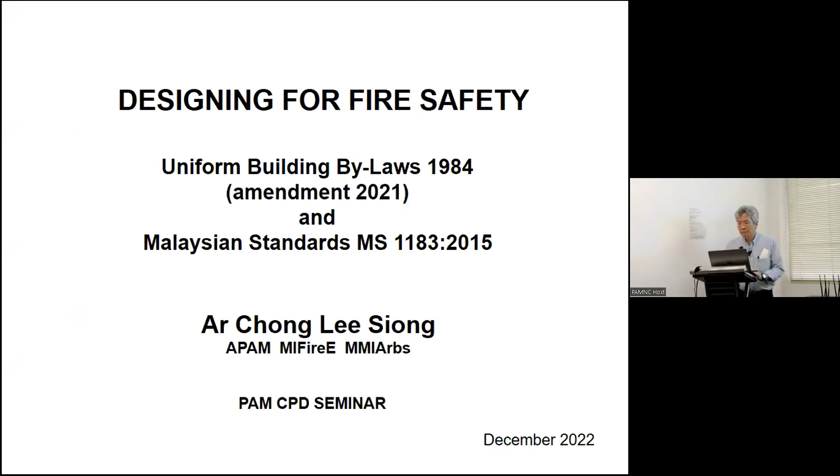So just to recap, the Uniform Building Bylaws are actually a prescriptive building code. It is a law, right? Unlike a lot of other standards we may be familiar with, this document is actually a law, not a standard we use as our guide to designing buildings. It's the same way you don't learn how to drive by studying the traffic laws, you learn how to drive by physically learning how to drive. Then you learn the laws to give you the limitations or prescriptions as to how you should behave on the road. So the law is just that. It is a prescriptive building code. It doesn't tell you how to do things, and it doesn't tell you why you should be doing it. All it says is that you shall do this, you shall not do that. Whatever you design cannot be smaller than this, cannot be bigger than that, cannot be shorter, cannot be longer, etc.

Following on to that, we have the Malaysian standards, of course, and not only 1183 - 1183 is the overall standard, I shall say, that prescribes fire safety. The standard is more descriptive, it provides informative descriptions. It establishes what are common and good practices, and most importantly actually describes the performance criteria expected of a design. For any particular element it will describe to you what is expected, why that particular element should be considered in a particular manner, and what would be the right way to do it. So the UBBL sets the parameters, the law, where you cannot exceed that threshold - if you exceed it, you're breaking the law physically. Whereas the Malaysian standards, by understanding them, you'll find that yeah, now we understand why the laws given have got those limitations.

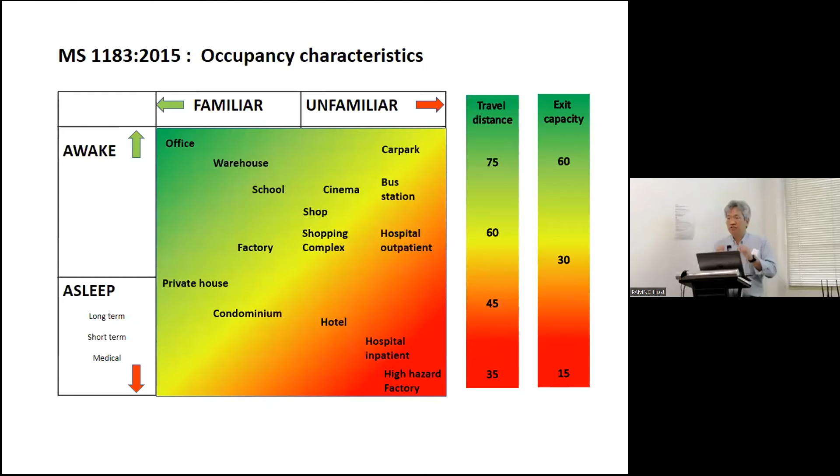The good thing about the bylaws is that you don't have to figure all this out yourself. All you have to do is look at the correct schedule and point to it. That's the good thing about bylaws. While it's not too informative about how we arrive at these figures, it gives you the general guideline. Once you comply with it, you're deemed to comply and your building is deemed to be safe. That's the whole purpose of the bylaw.

Okay, let's go on to evacuation. We're all very familiar with it now. Evacuation involves detections, alarms, exits, travel distances, components, and capacity of exit. These are all the things that are defined and described in the UBBL.

The accepted assumption in designing for safe evacuation, always remember this: the law does not expect you to design for all situations. That would be for us as an architect. When designing a building, it's for us to figure out what is best for the particular purpose of the building we're designing for.

That is our job, our obligation, and our professional responsibility, and hence the liability that comes with it when doing any project. But what the law does is give you a very broad frame, saying if you make this assumption, you would have exercised the minimum degree of professional discretion. That is all it says. So only one fire at one location at one time. That's all the law says is sufficient.

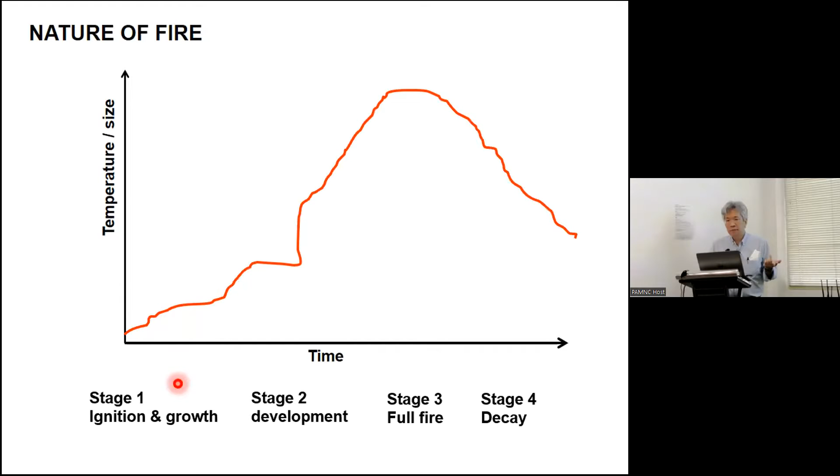So fire temperature, size, and time. Okay, the temperature will start with the first stage, which will always be the ignition. You have oxygen, you have heat, you have the fuel, and then you introduce sufficient heat to the point that the fuel can release its carbon molecules for the oxygen to hang on to - then you have combustion.

That is the first stage. If you have sufficient fuel and sufficient heat for the combustion process to continue, the fire will start to eat its way and grow, becoming hungrier and hungrier exponentially. You'll hit a point in time where the temperature reaches a height where everything else starts to combust - that situation is known as the flashover. The flashover is the point.

It's a bit like your oven. You set your oven - you want to roast a Christmas turkey. What's the temperature to roast a turkey, 200 degrees or 250?

Let's assume the oven is set at 200 degrees. When the oven reaches that temperature, everything inside it—your turkey, tomatoes, carrots, whatever you put in, not lettuce though—will start browning because it's 200 degrees. Set it at 300 degrees and everything turns black. Flashover refers to that condition whereby the temperature reaches a threshold where the contents in the building, or in the oven or room, will start to combust naturally, without any flame being introduced, just because the temperature has reached that point. That threshold is called the flashover.

So designing for evacuation means looking at that very early phase of the fire's development. If I enlarge the graph a bit: you have the ignition, the fire starts to grow, and it reaches the untenable condition—this is not flashover, but untenable condition. So at this point in time, between the ignition of the fire and when the condition reaches untenable, that is called your available safe egress time.

In the apartment fire just now, the available safe egress time was something like less than 10 seconds between the ignition and the explosion. So they had 10 seconds of available safe egress time. The two occupants in that condominium had to get out within that time.

So when we do the design, in terms of available safe egress time and getting people out, you must first be able to detect the fire. Then after detection, you must raise the alarm so you can determine, okay, I can't put out this fire, I have to run out. Then you have to actually start moving, and finally you need time to get to the door and shut it behind you as you leave, shutting the fire in. So that's also evacuation—in any incident, it goes through exactly the same stages: detection, then alarm, then movement, then finally total evacuation.

So the way we design fire safety and come up with the prescriptions is that we want to establish what's called the required safe egress time. We want to design the facility to allow all the occupants to get out of the building within three-quarters of the available safe egress time. That is what we do.

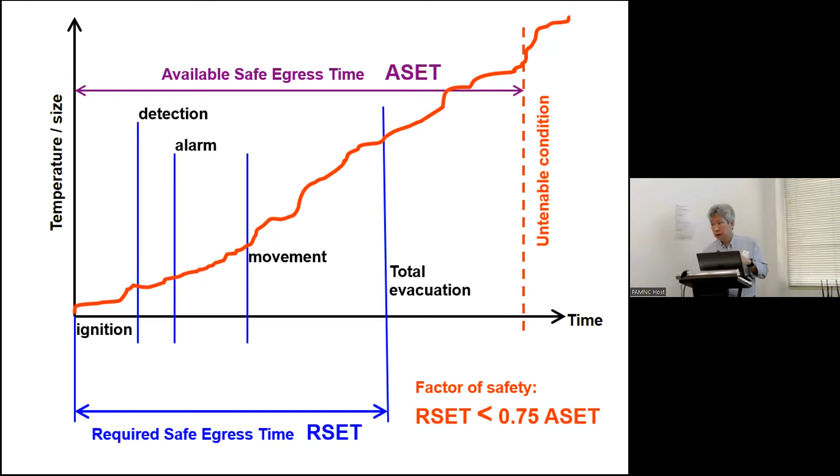Okay, all right, so we come to exit. Now we're speaking about components. We have to recognize these terms. When we're designing for exits, we have to recognize what is known as the final exit, alternative exits, story exit, and horizontal exit.

I've got alternative exits in inverted commas because alternative exit is not actually a described term. You have final exit - final exit is one definition. Story exit is another definition. Horizontal exit is another definition. And any of these - final exit, story exit, or horizontal exits - can make up alternative exits. Alternative exit is a requirement that on every floor, you must have an alternative exit. That means you cannot rely on just one mode of exit in one direction. You must have an alternative exit.

And exits can be, of course, the final exit is the final exit. You're supposed to hit the final exit, right? But before you hit the final exit, you can have story exits and horizontal exits. And any of these will have to be configured for every floor to have alternative exits. And then connecting the final exit with the story exits and the alternate and the horizontal exit will be what is known as the exit route.

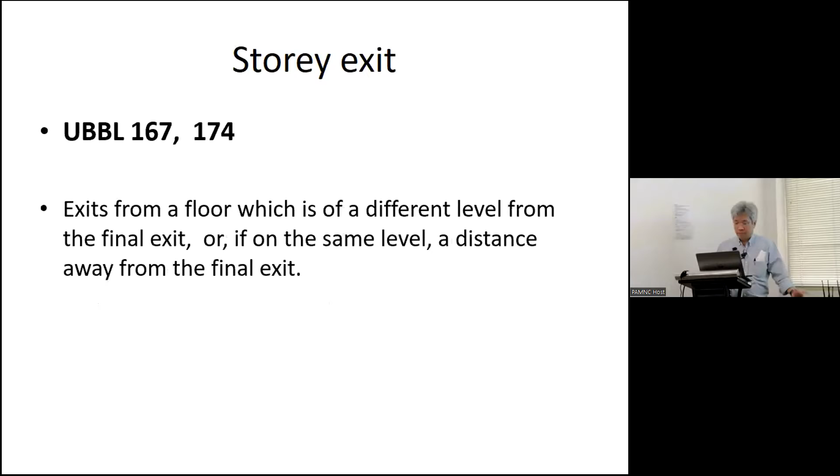Horizontal exit is generally an exit that leads to an adjacent separated compartment within the same floor. The storey exit is the exit from a floor which is of a different level from the final exit. The exit route is generally the protected passage from a story exit that leads to a final exit, and this can include places that are designated areas of refuge, anywhere between the story exit and the final exits.

Now, this is where the travel distance comes in. Travel distance will have the dead end limits, the direct distance, and the open plan distance. We should be quite familiar with it now.

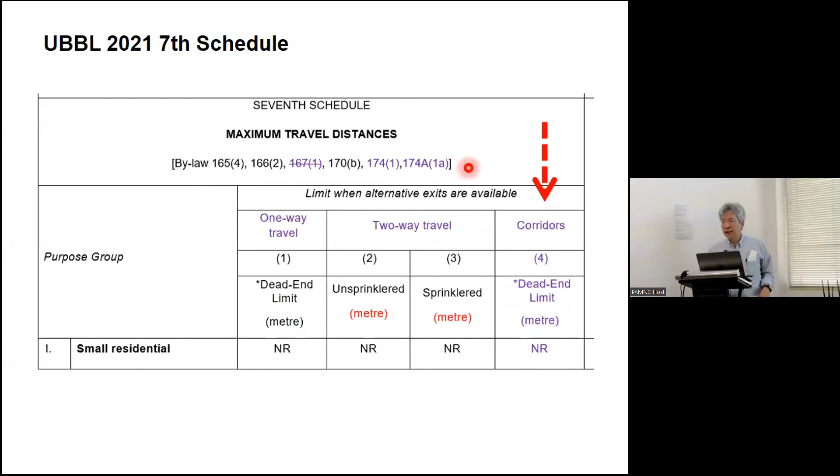The first thing that is now introduced in the UBBL 2021 in the 7th schedule is this additional column. So we are now recognizing that corridors are actually subjected to travel distance limitation. And in this case, it says dead end. Basically, what it means is that corridors, you're applying the same travel distance where there's a two-way travel and where there's a dead end, right? Especially corridors.

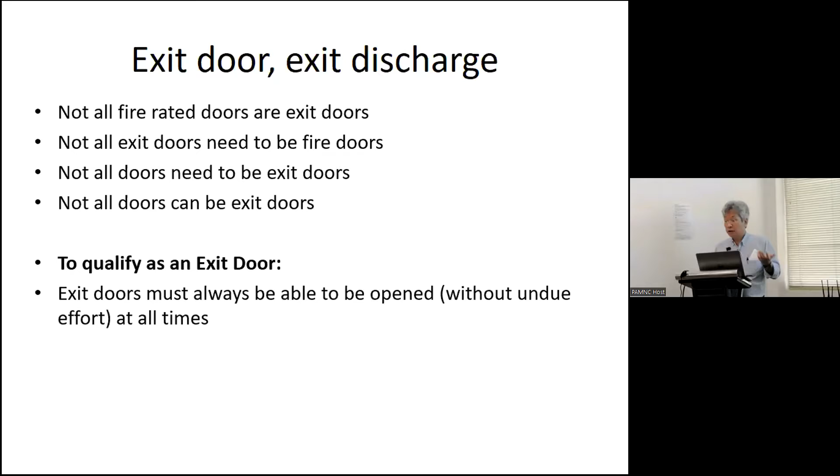Okay, to qualify as an exit door, now I'm referring to the door itself. To qualify, an exit door must always be able to be opened without undue effort at all times. So it's very simple, an exit discharge must always allow the passage of people at all times.

And that is what you designate, right? You can have many, many doors, but they're for accommodation purposes. You need it for security, crowd control, or whatever. But exit doors, you can have all your accommodation doors also function as the exit doors. You just need to configure it in a manner that it can have that dual mode.

Under normal usage, the doors are secured with card access, for example. But if you designate that door to also function as an exit door, in fire alarm mode or in an emergency, there has to be a means to totally disconnect all the access controls, and the door will then function as a push-open exit door. So yeah, just having the understanding would solve a lot of clarification.

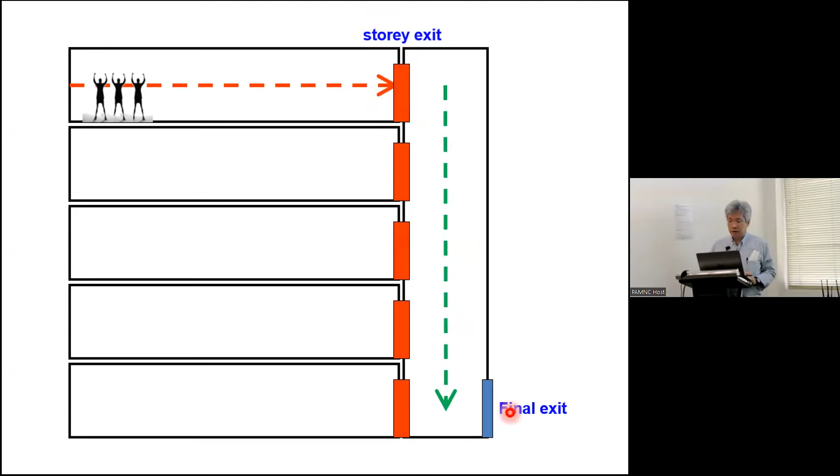So that function is taken by the story exit, right? What would actually have been the final exit is now a story exit because it's now above. And connecting the story exit to the final exit, this will have to be a safe passage, and that will then be known as the exit route.

Right, so it's the same thing. If we have an internal compartment in between, on the same floor, on the same horizontal passage, the person runs from that compartment, crosses that horizontal exit into the second compartment. Now that would then be the horizontal exit, before it reaches the story exit, which then brings them vertically down or up depending on the situation, by the exit route, to the final exit. So the travel distance limitation is within any of this fire compartment, measured from the most extreme end of that compartment to the story exit, horizontal exit, or final exit.

So those will be the limitations of the travel distances.

As to what this horizontal exit actually does, remember we now introduce the recognition of a corridor. So when do you apply the concept of a corridor, or when do you apply the concept of a horizontal exit? Let's go back to some very basic diagrams.

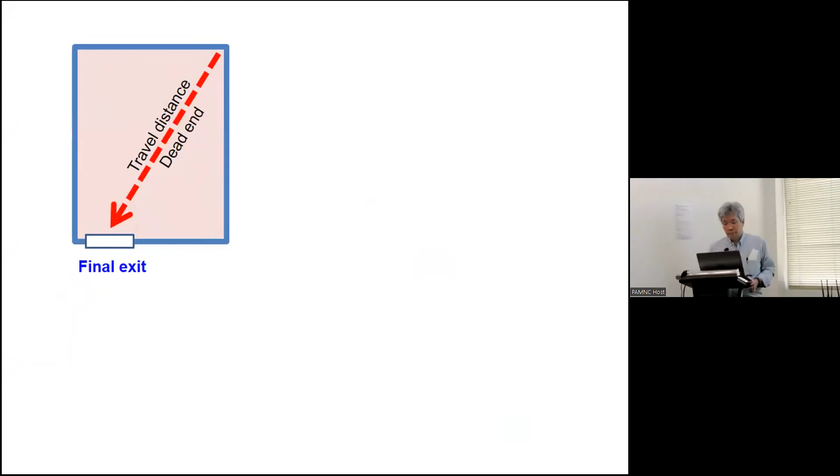Now, if I bring this floor up the stairs, exactly the same situation. Now the final exit is no longer a final exit, it is now a story exit. So that goes into the protected stairs, which is green, for you to be able to reach wherever your final exit is, the level of final exit.

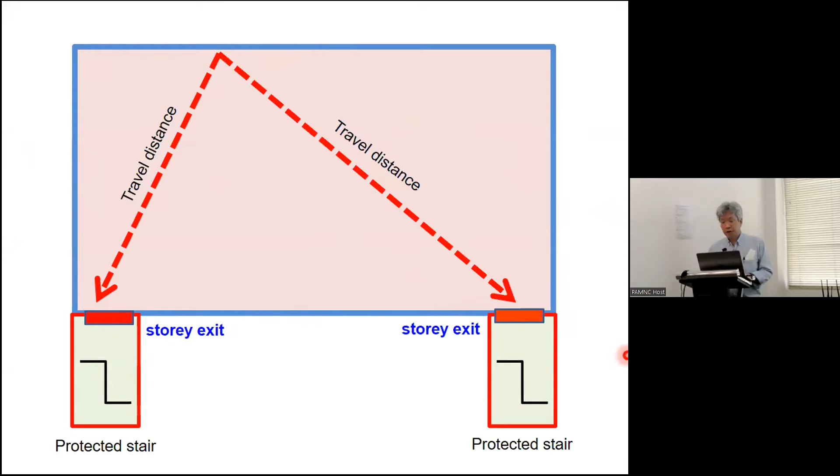If I widen and make the floor space much bigger, the concept remains exactly the same. It is also whatever the travel limitations are within this space for you to reach the story exit that will eventually lead to the final exit.

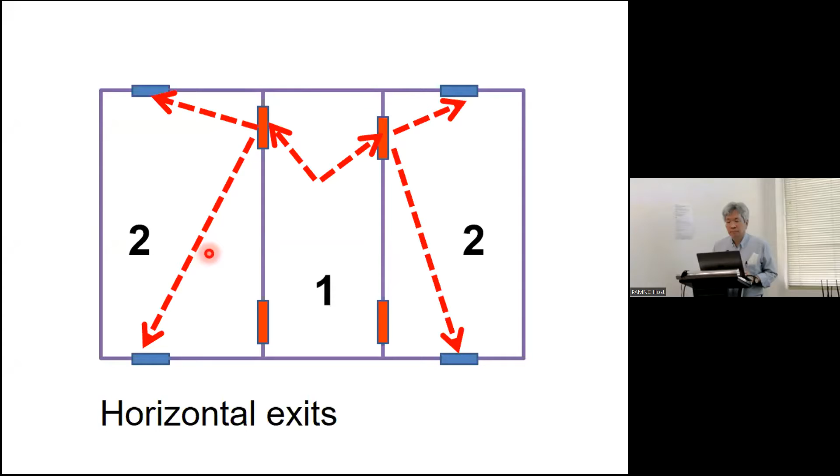Okay, in the situation of that concept, you can, but you will want to define it this manner. If I go back to this, if you have a very, very large condominium here, say over 2 stories and very, very deep plan, there are travel distance limitations within your own compartment. Dead end, in UBBL 2012, the dead end was 20 meters. So now we have reduced it back down to 15 because of this concept here.

So you're allowed to now play a little bit more with the applications of the horizontal exit. Within this one here, you can say go to a horizontal compartment, these 2 ways. But each one of these compartments will still maintain its own travel distances. But each of these compartments will then have to go through one horizontal compartment before it reaches the story exit. So they must have the alternative. It cannot be a situation where this horizontal exit, this protected corridor is over here, and this compartment will have to discharge into that before it goes into that corridor.

The same concept still applies. You can really only get people through one layer of horizontal exits. Same concept will apply. Because the risk is always that if you're the inner compartment, the fire is occurring in the outer compartment, then you have no alternative anymore. And that is always key.

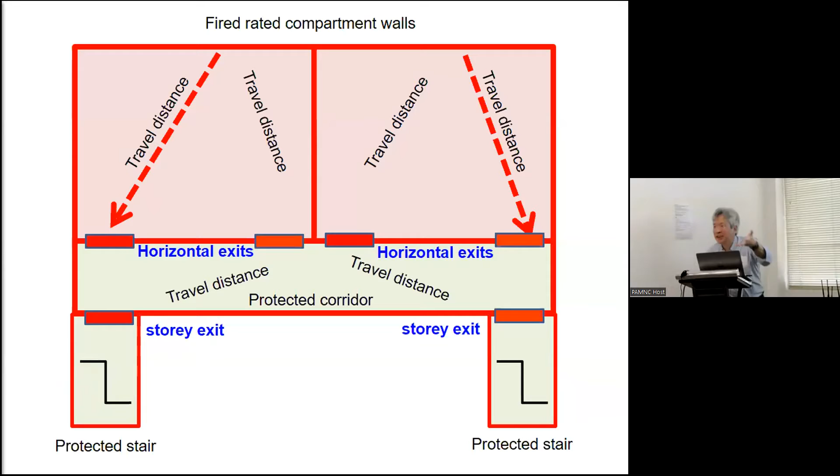Yeah, you don't tell the owner, he wouldn't know. Buy your QS a good lunch so that he wouldn't raise that issue. Yeah, that's right. Well, ultimately, we are the architects - we say so, that's it. No one should challenge it.

All right, so this is the recognition. This practice is not new, this is what it's always been. And by 2021, we just made it clear that this is the way it should be measured. So we hope that from now on, this should solve a lot of the problems.

Another addition to UBBL 2021 is this. Just to recap with this diagram, we've got the travel distance, storey exit, exit route, final exit, horizontal exit. So this area over here where the final exit is - very often, our actual final exit is a distance away from what we think was the original final exit. This is particularly prevalent in, say, a hotel or a commercial high-rise building. The stairs and the lobbies all come down to the lobby, and then you say, so where exactly is the final exit? Your stairs open up, I'm in the lobby, and the lobby's got Christmas decorations, etc.

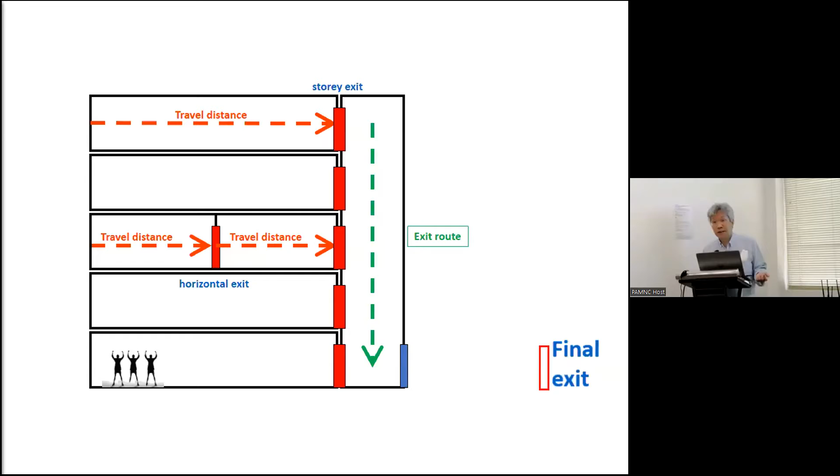So UBBL 2021 addresses this space over here, from your discharge, from the stairs especially, down to the fire appliance access level. And if your final exit is actually a distance away from the exit of that protected shaft, now we call that the path from storey exit discharge to the final exit. This is where UBBL 2021 has come up with new prescriptions - it's in clause 174A under final exit, immediately after 174. They just slotted this additional thing.

To cut a long story short, it's like this: if you have a simple arrangement, you have the protected stairs coming down - this is the ground floor or the lobby area. You have the ground floor where the final exit, the stairs come up, go straight out to the street - don't get knocked down by a car, but go straight out to the street - and those are the final exits. So the final exits are, that's it - once you cross this threshold, you're in the final exit. Now, what this new clause does is, it sorts out this area over here, if you're discharging into, say, a courtyard, you're still within the building compound.

You still got fences, you still got the main gate somewhere, or you're discharging into a Medan Selera, or into the lobby podium, where you'll see that the owner has rented out all the space for hawkers and kiosks, or there's a giant styrofoam Santa Claus decoration, things like that. Okay, now this is where 174A comes in.

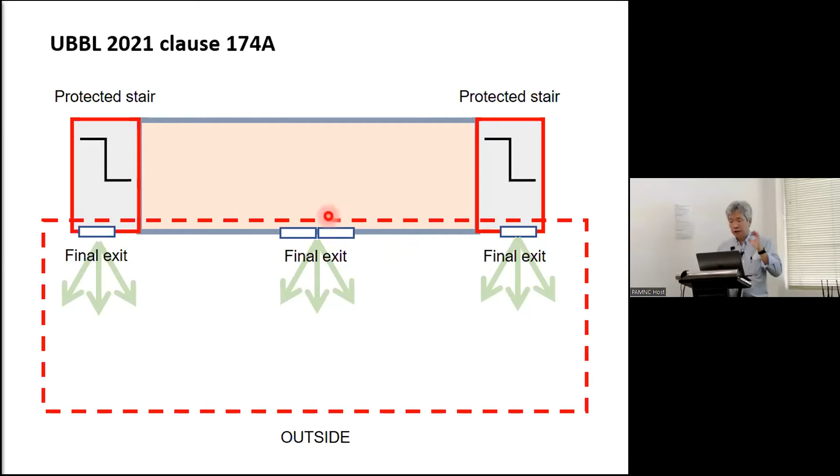It gives you additional prescriptions and what you can do within this space. Once you discharge into this space, from this final exit you have to go either into a protected and enclosed corridor with the distance and dead end limitations as per the 7th schedule, or you can go through a sheltered, open-sided corridor, not more than 5 meters within the building.

Okay, I know you'll be wondering what in the world am I talking about here. I also didn't have a clue what it was, so I had to do a bit more investigation. I will describe it to you later.

Or open to the sky and an unenclosed corridor with two-way travel. Essentially, the last one just means if you go to an open courtyard, as long as there's nothing above you and you got two-way travel to an exit, to a final exit, that one is very simple. The first one is also very simple, a protected exit corridor.

So you come out over here, okay, and you're having a lot of commercial activities over here. So what do you do? You create a protected corridor. Come out, enter a protected corridor with the travel distance limitations, and go straight up to the exit.

Very simple. The last one is, okay, go into an open courtyard area, totally unenclosed, and you can travel in 2 directions to the exit without travel distance limitation.

Okay, number 2 is the one that's a little bit funny. Actually, we plucked this straight off from the Singapore Civil Defense Force prescriptions. We really thank the Singaporeans, they're actually very good in terms of their legal logic, in terms of how they write things. So the next slide I'm going to share with you is plucked straight off from the SCDF Code of Practice for Fire Precautions in Buildings.

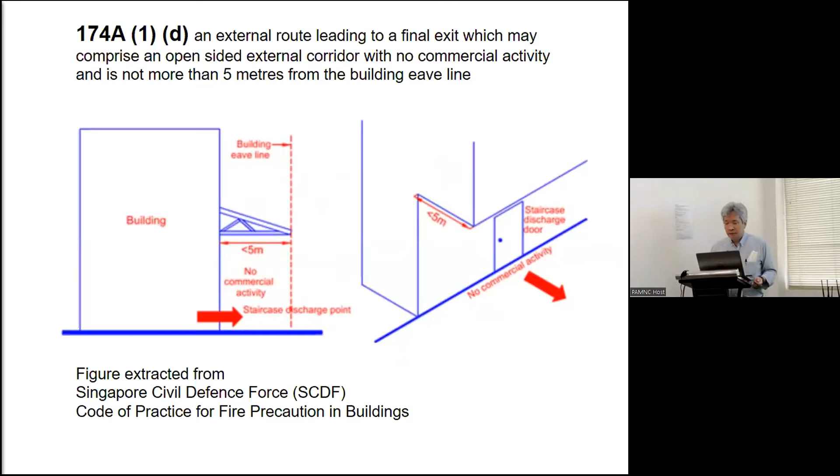We are the architects, so the whole purpose of this is that we are designing such that when a person comes out of this, he's not under a risk for more than 5 meters in this situation. Right, so if the building above over here contains aluminum cladding — later on I'll be talking about BS 8414 — if that's kind of a risk, no way, you have to get the people out in another manner. Okay, all right, so further on to 174A would be on the enclosed areas that you're exiting from.

Just now was on the stairs going into an open area and the limitations of what you have to do. Now is on the stair discharging into an enclosed lobby. The same concept applies. This should have been the final exit, but however, if the building is designed in this manner, then you'll have the stairs discharging into what is otherwise really an internal space.

The first limitation is that you cannot have more than 50% of the stairs discharging into an internal space. So if you only have 2 stairs, both stairs and capacity, you have to balance it off. Physical number no more than 50% and capacity also no more than 50%. So if these two stairs share the same capacity from the floors above, only one of them is allowed to discharge into this space. The other one must be outside.

So if you have 3 stairs, how do you divide it into 1.5 stairs? No, if you have 3 stairs, then only one is allowed to discharge in, and the other 2 must be discharged outside. So it's up to 50%, no more than 50%. Then from here, you have to designate a travel path from the discharge to a final exit, and this one is limited to 10 meters.

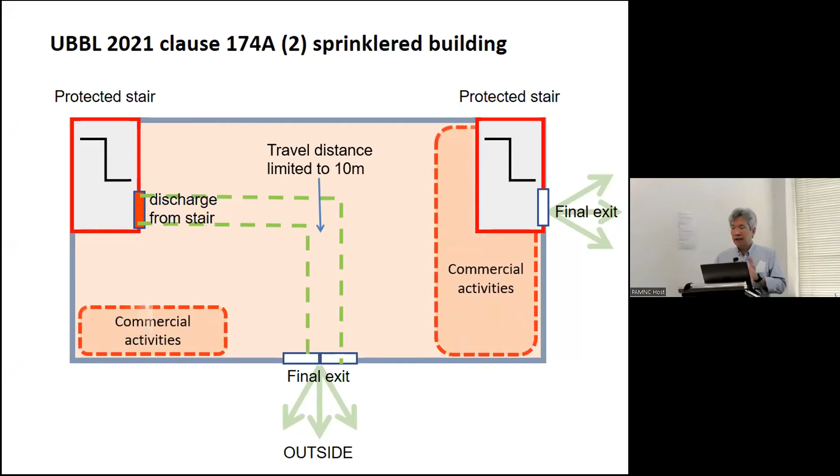Then, as to what else you can do around it: if you're not having any firewalls or compartment walls, and you're having any other commercial activities like kiosks, Christmas decorations, anything that may be combustible, you'll have to keep it a minimum of 10 meters away from this designated path of travel.

I know this diagram is not to scale. There's a 10 meter travel distance limit here, and yet I've got a 10 meter buffer here which appears to be a lot shorter than that. Okay, my apologies. When I was drawing this, only then did I realize I can't exactly get the right scale in place. So the written dimensions are the more critical ones.

Any commercial activities which are not fire isolated, meaning not behind a firewall or not in any compartment, will have to have a minimum 10 meter buffer. And this 10 meter buffer is also very generous. Generally nobody is going to measure it specifically - where do you measure it to? Is a person standing there considered a commercial activity, or is it actually the display of the goods? So that is very vague, right?

But the intention is quite clear that if you have a situation where you're discharging into a common lobby, you must allocate a very clear line of discharge route to the final exit, within 10 meters of travel, within line of sight. That means with great clarity, visual clarity as to where the exit is, and keep your commercial activities 10 meters away. So should there be a fire, you will not have undue impact to the people who are exiting from this building.

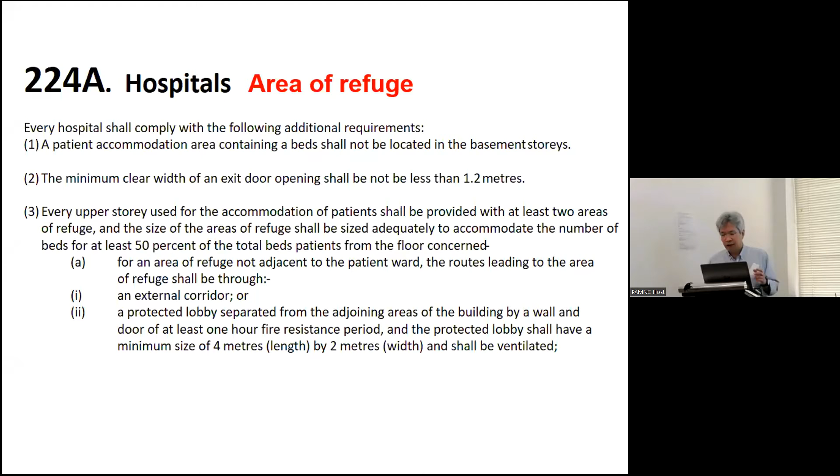I'll go straight into describing what it is. It is all about evacuation or the safety of occupants. This doesn't apply to the whole hospital, only to the patient accommodation. If you're doing an outpatient clinic, or even a daycare or day surgery clinic, this condition does not apply. It only applies to hospitals or facilities where you have overnight stay or long-term stay accommodation after surgery, or any of that. So we're referring to wards. It only applies to wards.

Whenever you have a ward, this applies. So the basic concept is this: every ward must be serviced by, or must have access to, 2 independent areas of refuge. This brings in the alternative exit again. So every single ward must have 2 areas of refuge, and these 2 areas of refuge must be realistic or genuine alternatives, preferably in the opposite path of travel, or at least in a path of travel that is genuinely an alternative, right? Should one be incapacitated, the other one is available.

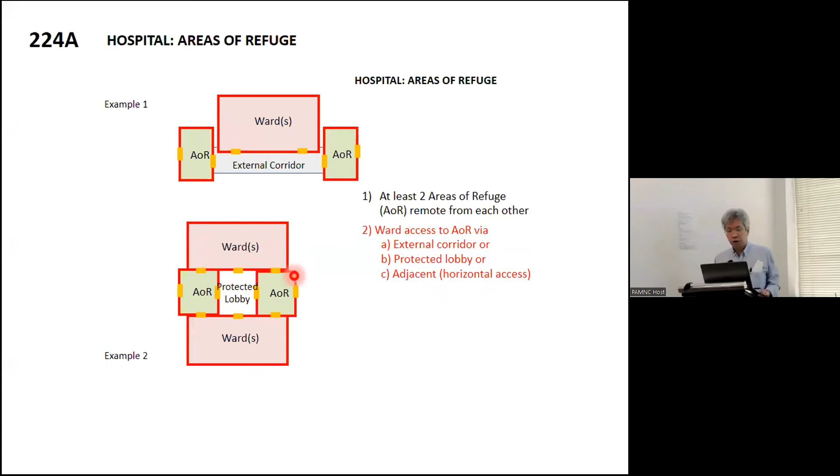The second requirement is that ward access to the AOR shall be either via an external corridor, which in this case I've indicated here, from the ward you go to an external corridor. Just now we were mentioning the corridor, and there were some discussions offline about apartments, front door to protected corridor or to an open corridor concept. The same concept applies here. The ward gets access to the area of refuge either via an external corridor. If the area of refuge is a distance away from the ward, it doesn't have to be adjacent, but you have to go through a safe corridor. Or if the wards are adjacent to the area of refuge, you will have to go via either a protected lobby or immediate adjacent horizontal access. So either you go through a protected lobby, or if it's immediately beside it, then you go through a horizontal access.

And each area of refuge is to be served by at least one fire escape bed lift.

That is the whole purpose of the area of refuge. The clause itself also specifies the minimum accommodation size of the area of refuge. It doesn't give you a specific description on the actual size, but it says each area of refuge must accommodate 50% of your intended bed capacity. So if the ward carries 50 beds, each area of refuge must be able to accommodate at least 25 beds. And it doesn't even prescribe the size of the bed or how you're supposed to arrange the bed. You are the architect. The UBBL allows you as the architect to decide how to maneuver the bed into position.

What about additional spaces for the attendants, the nurses, and circulation or things like that? That one, they leave it to us as the architect to decide and design. The thing is that the area of refuge is supposed to be a holding area for all the stretchers and the beds.

If each area must be at least 50%, it just refers to that you go to one area of refuge and can at least accommodate 50%. So it's like, let's say two wards discharge into two separate AORs, the bottom example. That means we look at the total beds for the two wards, and the AOR must be 50% of that. Can one be bigger, one smaller? It can be, but the smaller one must be at least 50%.

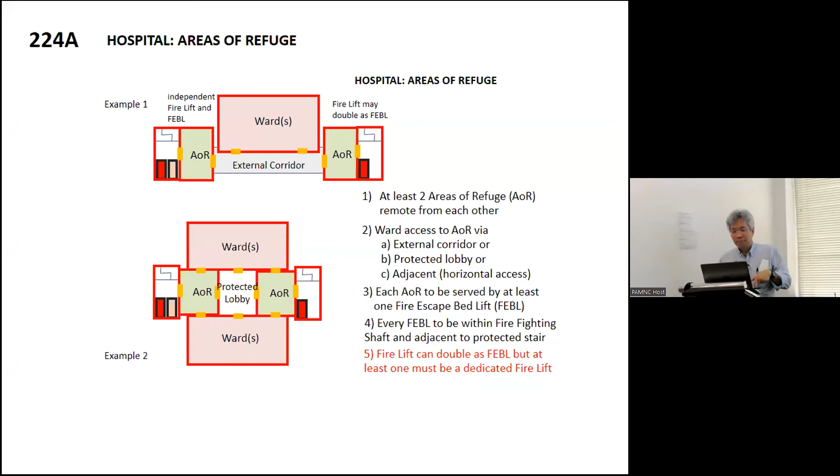So just now I mentioned that to get to the AOR, either through the external corridor, internally through a protected lobby, or a direct adjacent access. For the direct adjacent access, it will be a fire separation minimum of 1 hour FRP. You mentioned that - minimum fire, 1 hour FRP. You must have a minimum engineered smoke control, 2.5 meter smoke layer, and a minimum of 2 exit accesses located as far apart as practical. So if this is the AOR adjacent to this particular ward, you can literally just go next door - these are like a horizontal exit.

Just have the doors - for one AOR, you must have 2 separate entrances as far apart as possible. This is actually to facilitate more movement, so that you don't queue up in one spot - you're trying to move on both sides. Fire rated, 1 hour fire rated, and essentially just an adjacent horizontal access. And this AOR in turn will be connected to the firefighting access lobby.

In slightly more complex situations where wards open up into nurse stations or other adjacent areas, the concept is actually much the same. You'll be entering through either an external corridor or an internal corridor, which is protected or ventilated, going into a protected lobby. Like the other case, if you're not going from the ward immediately adjacent into the AOR, you go through a protected lobby, then into the AOR. If this corridor is going through a high-risk, non-ward area, you'll have to carry the same degree of fire separation. The idea is that this internal corridor acts as the safe corridor to access into a lobby, in turn accessing into the AOR.

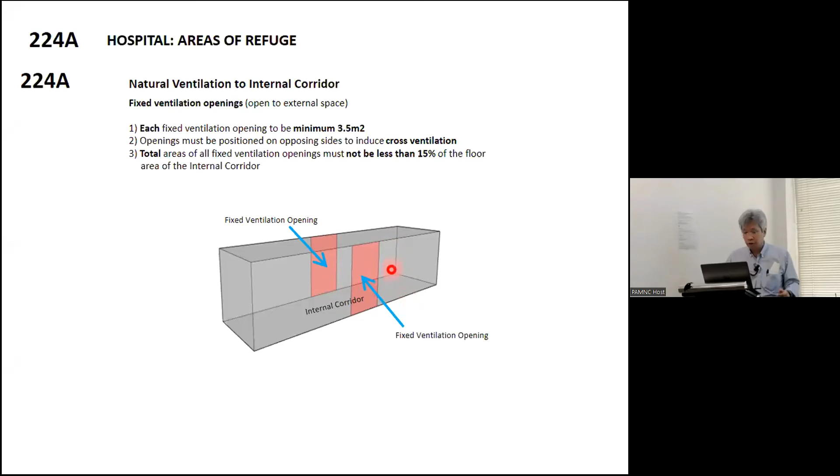When you have an internal corridor, if you're not pressurizing it and instead allowing for natural ventilation, then minimum compliances for natural ventilation come in. You need minimum openings far bigger than the ventilation required for staircases and corridors. The whole idea is to get cross ventilation, which is good practice — really, we should be applying this for all corridors we design anyway.

Specifically for hospitals, they want this defined clearly. The idea is that every single natural opening for ventilation must be within 12 meters of any part of the internal corridor, and ideally placed to induce cross ventilation. So if you have a far longer corridor, the most ideal location would be two openings at the extreme ends, and another one in the middle to comply with the 12-meter radial coverage. That means every part of the corridor cannot be more than 12 meters away from a natural opening.

If you're going for natural ventilation versus mechanical — if going mechanical, then mechanical ventilation, pressurization and smoke control all come in together.

Particularly for hospitals, for areas of refuge, we've now introduced an 11th schedule to the UBBL — we had up to 10, so now it's the 11th schedule. Its sole purpose is for dimensioning stair landings for the maneuvering of stretchers or beds on stretchers. The concept is actually very simple: generally, it controls the depth of the landing.

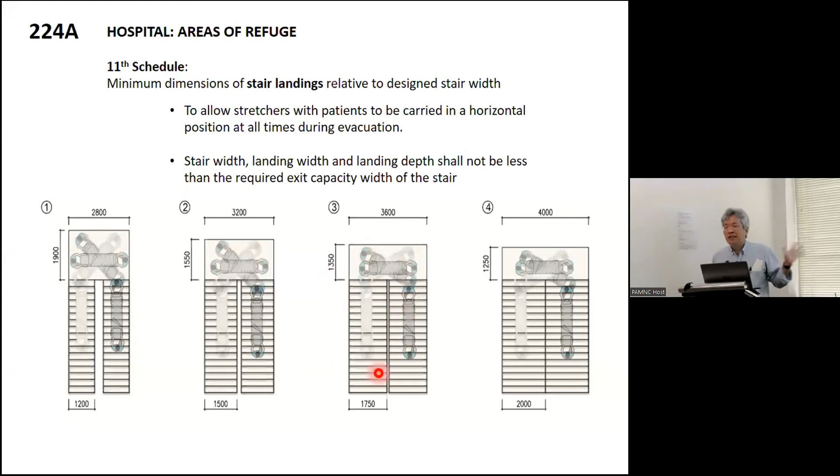There were never any limits to the height of hospitals. It is always limited only by the functional practicality of designing a hospital. There was never any bylaw limit to the height of hospitals. That's a separate thing - Ministry of Health will have their own control. But as far as bylaw is concerned, we leave it entirely to your technical expertise.

Okay, I will skip evacuation strategies because there's no change on this. I'll just skip all of this.

All right, the single stair. Coming back to the single stair. UBBL 2012, we introduced the single stair. That one caused a lot of hoo-ha. And I think now most of us have accepted it.

The limitation was that we limited it to 2 stories. We limited it to 2 stories and made a condition that the upper floors can only be used for residential. Ground floor must be shop, but upper floor - no office, nothing else, just residential. That was the limitation that killed all our developers.

Now in 2021, we just made a clarification - very simple one. Instead of defining shophouses or dwellings, we are now calling them buildings. So yay, it's open up again.

So you can do your karaoke lounge up there now, right? But then you said, how come? How come you had such a big change of heart? How do we do that? No, it's not so easy.

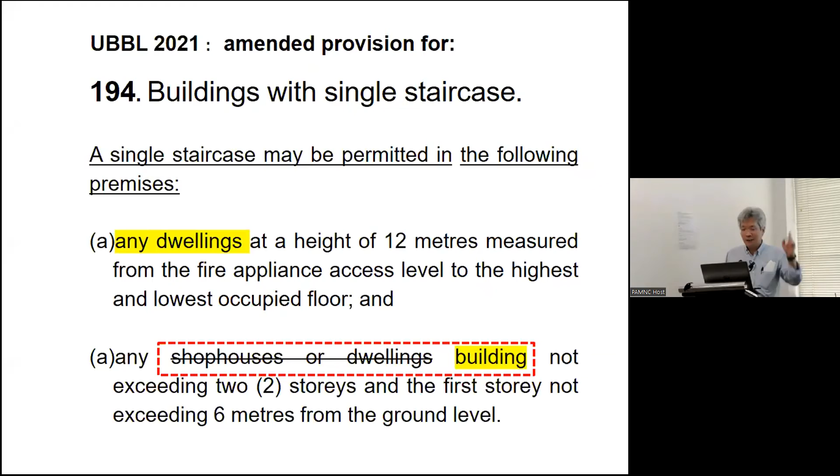The old 1984 definition was like this: up to 4 stories, 12-meter height and all that. So now we're still limiting it to 2 stories, and the uppermost floor only two stories, not 3, not 4 - only 2 stories, and the upper story not more than 6 meters from the fire appliance access level, ground level, which is still the same.

Only difference is that we're no longer limiting the bottom to shop, limiting upstairs to residential. Now it's do as you like, right? But the condition is this: travel distance, dead end limit, exit capacity, story exit and final exit, and compartments all apply. So if you decide to do a karaoke room up there...

Okay, we let you have one staircase, but you're limited to the exit capacity and limited to the travel distance. So if karaoke room is under place of assembly, is it? Okay, there's no dead end limit. So you can't have a single stair if there's no dead end limit. So that's the way they control you.

All right, so do as you like. You allow a single stair, but the floor accommodation must be able to be served by a single stair - travel distance, dead end limit, exit capacity, story exit, and final exit. If you can find a way to make that work with a single stair, you can have that occupancy. I think it's very fair.

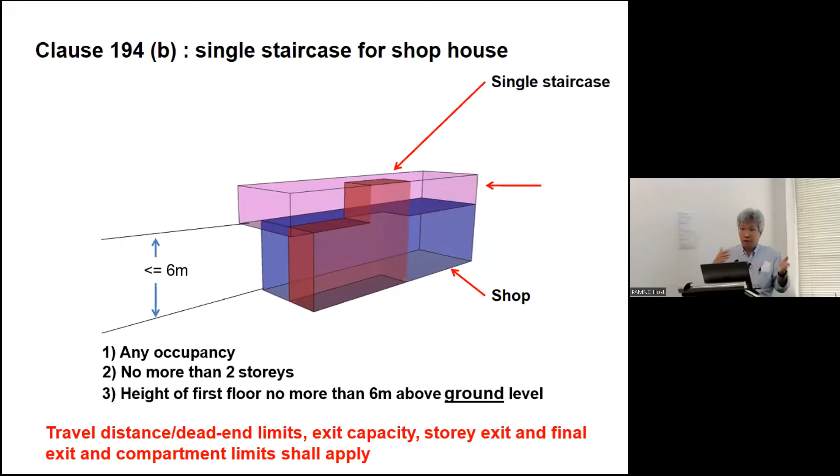It's only 2 stories, you're limited to 2 stories. Silent - so don't get caught. Actually, technically you can, because the mezzanine is half the floor, right? As long as you don't do more than half the floor, then it's okay, right? Okay, so this is it. Don't take too much into it.

It's really a post-occupancy control. When you design it, just design it within the travel distance, within the dead end limit that fits already, you hand over to the developer. Then it becomes a post-occupancy licensing issue.

Okay, capacity of exit - this is where there are some changes to the 7th schedule. We've added in now the controls of capacity exit for storage in general. Before, we never had this. Especially for car parks, we are always asking, how do we calculate exit capacities for car parking? We've always used, as a general rule of thumb, 2 persons per car. And then we find out that, yeah, mana boleh, that doesn't work for such things.

So now we've come up with the prescriptions. Generally, 20 gross is double of that of office accommodation. Office is 10 gross, so for car park we use 20 gross.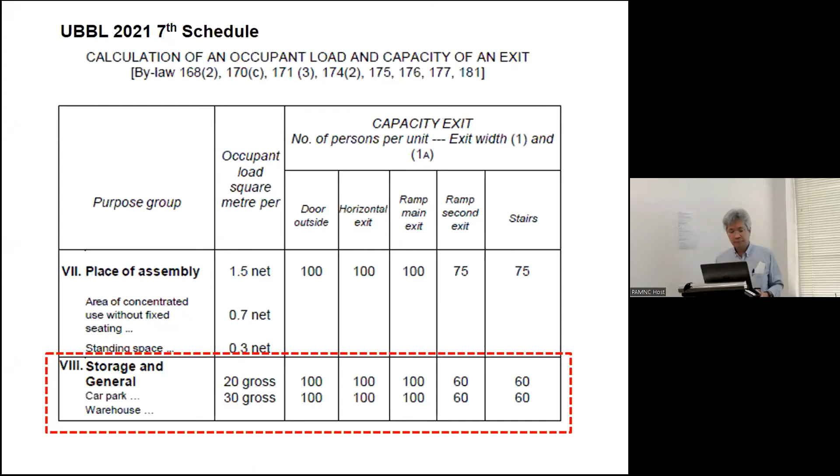Okay, I will skip through all this, there's no change in this concept. I'll skip through all of this too - no change to this compartmentation, size, and fire load, all this has no change. So no change to any of this.

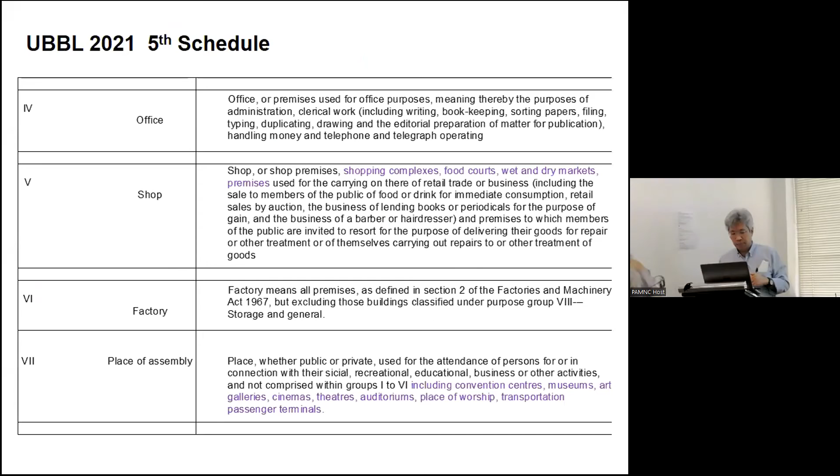All right, the 5th schedule now. The 5th schedule is where we have the purpose groups. Earlier on, I already mentioned that there are just some refinements to the categories of buildings to be placed under the purpose groups. Now, when it comes to the prescriptions, purpose schedule 5 limits the fire compartments of the building.

So alongside clause 224A, where we talked about the wards, particularly hospital patient accommodation wards, now has got floor area limitation. Every ward cannot be bigger than 750 square meters in floor area, and this one is not applicable for the doubling of limits if your building is sprinklered. So this 750 meters is absolute - you sprinkler the building, you're not going to get 1,500.

Just particularly for this, not even hospital as a purpose group, specifically patient accommodation ward only, is limited to 750 square meters. So this one, in a way, also limits the number of beds. They never say how many beds directly, they don't limit that, but within 750 square meters for us to design - it's just to limit that.

Yeah, this is a further one, from the same schedule. 750. Okay, all these remain exactly the same, schedules, all the 9, in terms of how we are supposed to compartment the building. All these remain exactly the same. The 6th schedule, I don't think I want to go into it, this one will be another full day worth of things. Okay, I won't go into all of that.

So now we're coming to the protection of the building from fire from floor to floor. This one is just a recap of what we currently already have: protection of the external spread of fire from floor to floor.

We have our prescription under UBBL 149 for the external fire barrier, the vertical barriers, and the horizontal barrier. Of course we all know the purpose is that it helps to deflect the flames. The horizontal barriers will deflect the flames, 750 millimeters minimum, and the vertical barriers, minimum 900 millimeters, will help to act as a flame barrier. The horizontal ones will be a flame deflector, the vertical ones will be the flame barrier.

Now, we have a situation of external cladding, right? We're all fully aware of that already. I don't think I need to show the Grenfell over here. Okay, why not, you just have a look at it again.

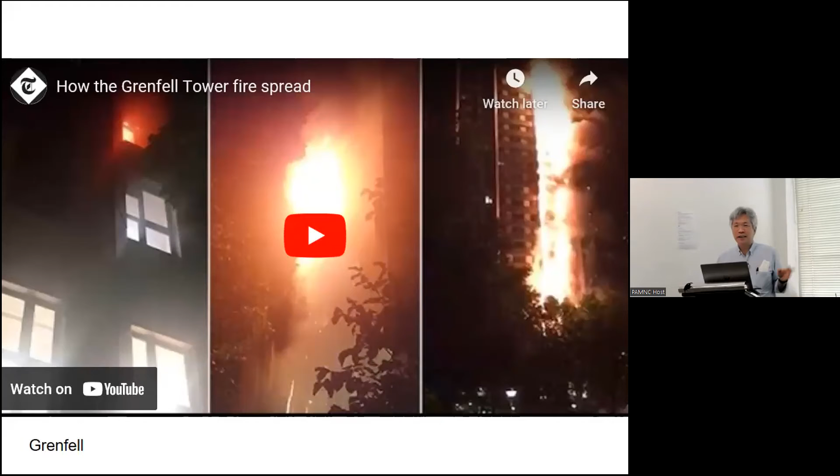Okay, sorry, I can't get the video working, but never mind. We are all very familiar with the Grenfell. Go on to YouTube, there are about 5 million different videos for Grenfell Tower. Suffice to say that it's a very, very disastrous event, very tragic, and it did fast forward our understanding and now the implementation of new laws and regulations regarding how we do external cladding.

This started off with Bomba issuing in August 2021 a permanent directive on the use of external cladding. Can be summarized in 2 elements: for all buildings above 18 meters in height, your external claddings must be subjected to the full-scale BS 8414 test, and it must pass. Then all external cladding for buildings above 18 meters in height must comply with the descriptions of the BS 8414 testing criteria.

Anything below 18 meters in height, sorry, it's not anything below 18 meters. If any building below 18 meters in height, then you are allowed to use Class O cladding. Any buildings above 18 meters in height, for the entire height of the building, it has to comply with BS 8414. Now this is different from our previous description. Our previous description is that anything above 18 meters, Class O; anything below 18 meters, you can clad it with timber, almost anything, and we limit the flame spread to Class 2 or 3 in some instances. So now it's no more.

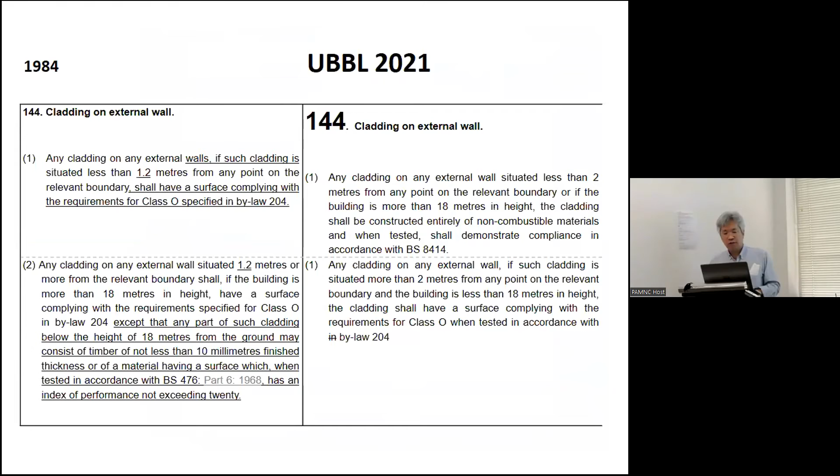So that leads us to UBBL 2021. After the directive, now clause 144 is on that. Again, to cut a long story short, very simple: it just means that if your building is less than 2 meters from the boundary, or your building is more than 18 meters in height, whichever comes first, the cladding system must comply with BS 8414.

If you're just 2 meters away from your neighbor, I don't know how you can build 2 meters away from your neighbor nowadays, but never mind. If you are 2 meters away from neighbor, don't have anything flammable that will face the neighbor. Or your building is more than 18 meters. So either you're closer, or you're more than 18 meters. However, if your building is more than 2 meters from the boundary and it is not more than 18 meters in height, then you may just comply with Class O. So a short building far away from your neighbor, you can comply with Class O. Anything other than that, you have to go for BS 8414.

And BS 8414 is really a series of tests.

It's a particular testing criteria. It involves the creation of a very big size mock-up which reflects every single component that you specify into the system. Most manufacturers, a lot of suppliers, especially the ACP world people, have taken their own initiative to erect their own detailing specifically to pass this test, because this test has got very precise criteria.

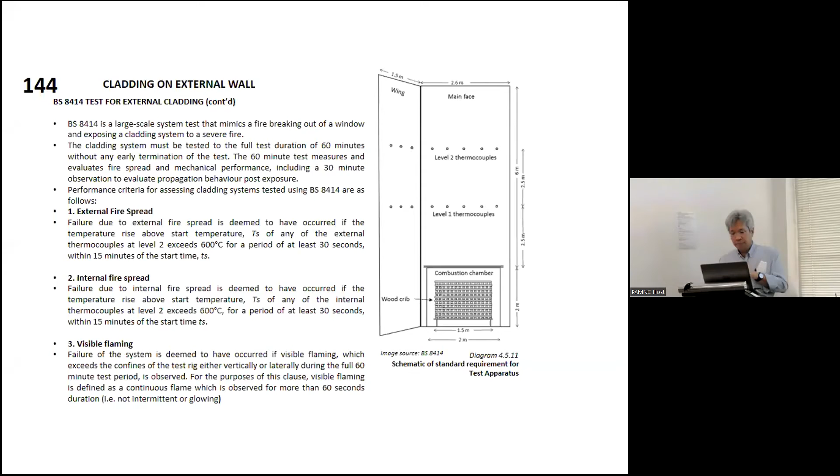Okay, this is a series. This one I must show you the video. I hope it plays.

Oh dear. Unshare. Unshare. Okay, we'll just try and stop sharing. Oh, the link is not clear. Was this one actually linked? Okay, never mind, my apologies. It may not be linked because it wasn't from my laptop, so the link may not be here. The link is missing. Am I sharing the screen again? Am I sharing the screen? No, I'm not. Oh, I'm sharing the wrong screen now. Okay. Okay, my apologies, I can't run the video because I just realized I transferred it from my laptop onto this laptop, and the link did not get transferred.

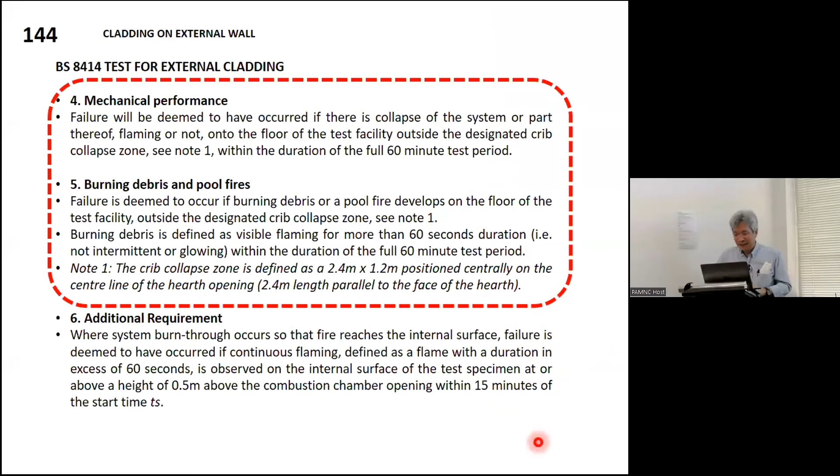Okay, then we go on to the atrium. I'll skip all of this now because this one is exactly the same as 2012.

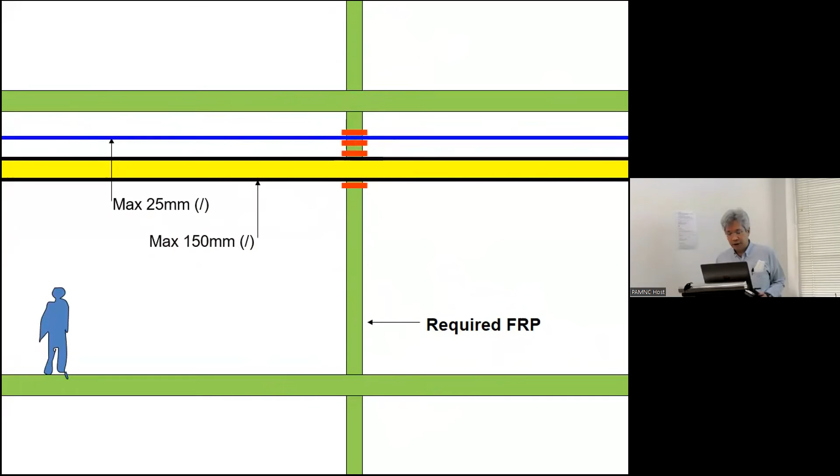All right, protected shafts. There was a question earlier about the full fire rating for doors and the half-hour fire rating. So just to quickly recap, this is a cross-sectional area of maybe a compartment, then a party wall and the slab. All these lines in green are the required FRP. Let's just say it's 1 - if the required FRP is 1, all this will be 1. And all these penetrations have to be fire stopped, and we have to also perform up to the requirement of 1. If you have a fire barrier, if you have a fire damper, for this duct, you also require FRP of 1.

But you can, if you insulate or protect the entire duct over its entire length - say this is, let's just say, actually the smoke exhaust ducting. You wouldn't want a smoke exhaust ducting to be protected by a fire damper, because it's counterproductive to what a smoke exhaust duct is. So for situations like that, you can protect, or you should - the only way to do it is that you protect the entire duct over its entire length, and this protection can then be half of the FRP.

So if you're putting a damper in this manner, the damper must be of the same required FRP as the wall. However, if you do the protection by the fire insulated duct all the way through, that ducting itself can be half the required FRP.

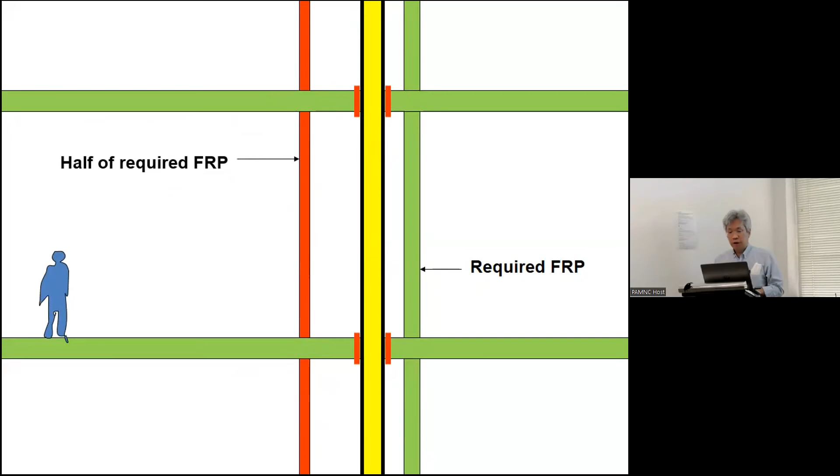Same thing goes with the vertical penetration. If you have all this penetration creating a shaft here, technically this cover for the shaft, this enclosure for the shaft can be half of the required FRP, which is why if you do a door here - of course if you do the wall and all that, the walls will be the same FRP as the structure. But the moment you put a door, the door can be half the required FRP.

If you do a full FRP structure, of course you don't reduce the wall - now the wall will be full FRP. But again, when you have protection like this, when you have a separation of fire dampers for the vertical shaft connecting the floors, these may be half the required FRP. And on the same note, if you have a door opening into the shaft or into a protected corridor, it can be half the required FRP.

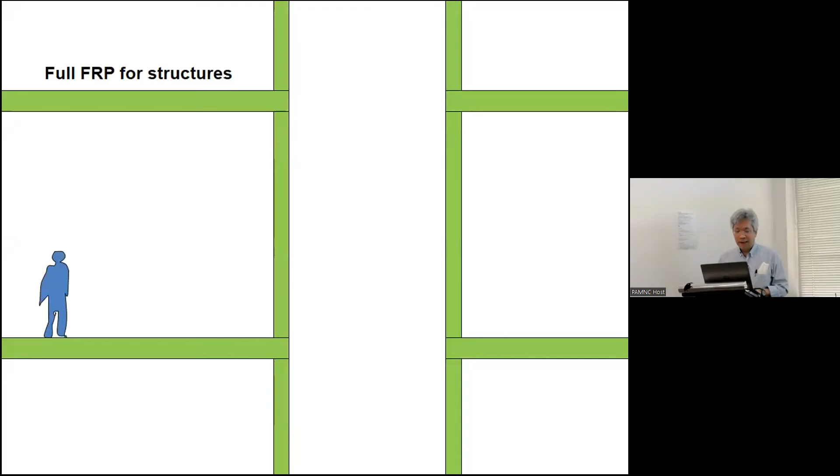Okay, so what is the logic? If you just look at it that way, some experts may not agree with my logic, but I think that's the easiest way for us to understand why.

Simply because if this is a protected shaft, if your requirement is 2 hours, if you start a fire here, you expect this wall to hold back 2 hours worth of fire. In a situation like this, the connecting fire is through this shaft. So if I burn over here, I have 1 hour protection before the shaft gets burned, and I have another 1 hour protection before the shaft burns back into this compartment. Okay, that is the logic. That's why you allow half the fire protection when you have a protected shaft or a protected corridor.

So when it comes back to that protected exit, you can have half the fire rating.

Okay, now fire shutters. As I mentioned just now, all protection of openings through a fire rated structure or fire rated element must have the same fire rating protection, or half in the case of through a protected shaft. But however, insulation is something that we've always not considered. When we talk about fire rating, we're really only talking about the integrity of the material, that it holds back the fire. 1 hour or 2 hour fire rating, the material has got integrity. It holds back the fire for that time before the thing disintegrates. However, insulation is also one of the criteria.

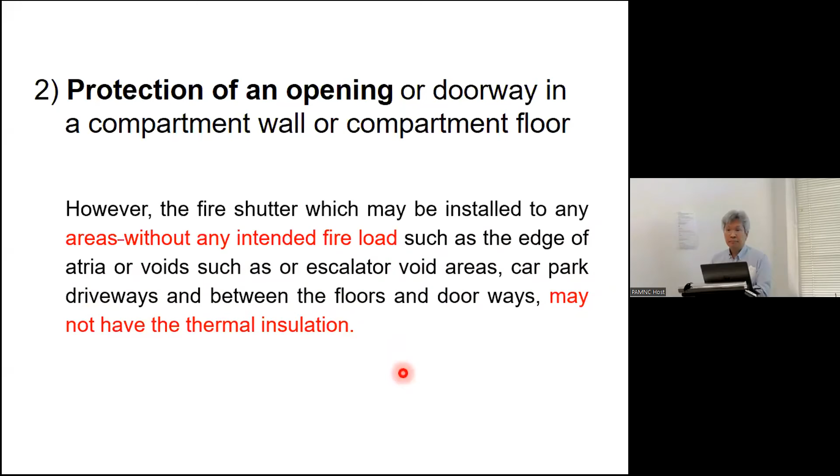I think the most obvious example would be a car park. If you have a car park driveway, there's no car park on either side anyway, it's going to be a driveway. So should there be a fire here, this thing will be burning red hot, but there will not be any fire load on the other side for it to catch fire. Likewise, like an atrium, if you're high up there, there's no fire load because there physically isn't a floor over here. So if this floor is burning, you get a lot of radiant heat, but it's radiant heat into the atrium. It will not, hopefully, ignite any fire load.

Okay, so this is the concession. But I'll say be very, very careful when you do this. Please don't save the money for your client if you don't have to. Car parks, I fully agree. Driveways, why in the world do you want to waste an insulated shutter on the driveway? I fully agree. But when it comes to atriums, void escalators and all that, when you're in an internal space, do think a bit seriously about it. Because this is just a general prescription. But when you design, you know your building best. So don't be too quick to save money for your client.

I don't think the videos will work either. This one here, I'm just showing an example of the installation of a fire shutter in one of our projects. This one is an office area, and this is actually the boardroom. The boardroom has a full height, full width acrylic window that overlooks their production area. So when they're having a boardroom meeting, they can watch everyone producing the money for the directors.

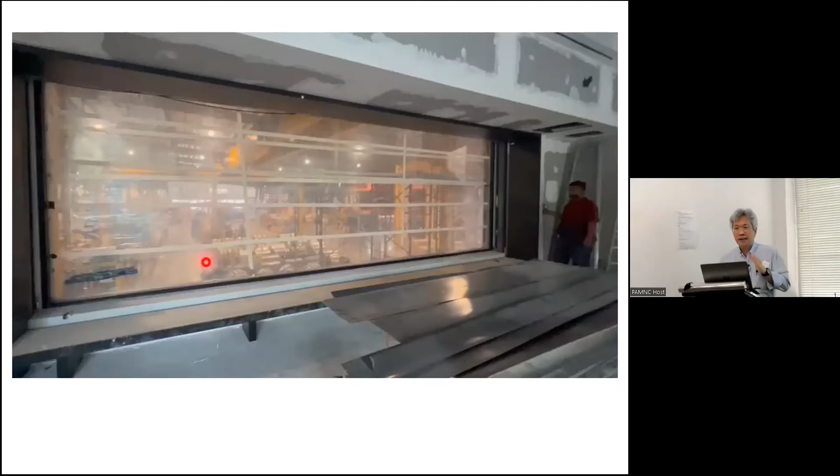Oh, it works. Wow, what happened? Okay, this is when it's opening. When it's closing, it's the exact opposite. This one is from one particular manufacturer. I shall not give them the benefit of free advertising here, but I think you all know who it is.

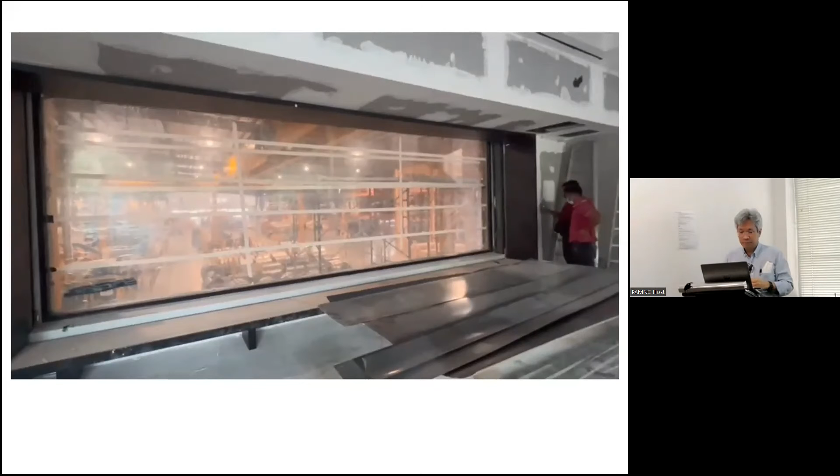So the panels come down and they're not roller shutters, they're actually just panels. They drop down one at a time and stack themselves up like Lego when closed. Then these are the more conventional ones, which are non-fire rated, but we know it's applied onto a driveway. Perfectly okay, there's no fire load.

This one is one example. Something seems to be missing over there. And this building has CF, it has Bomba inspection, it has FCs everywhere. Some of these applications, if you follow the bylaw strictly, do not need to be insulated because this is a car driveway. But then this is a lobby, okay, this is a common lobby. So I think the question comes: do you actually want to?

Again, if you look at it technically, what is the risk? Probably not much, because there's an atrium in there. This is the escalator void, and there are no commercial kiosks over there, no one's burning satay in there, that kind of thing. So I would say you may be able to get away with it. But do consider when you do your design, you are the architect, so you know the building best. You know exactly what the function is, how it's supposed to perform. I'll say do the right thing, don't worry about the client first. They've got money - if they don't have money to pay for this, they don't have money to pay your fees either. So don't worry about that. Do your job right.

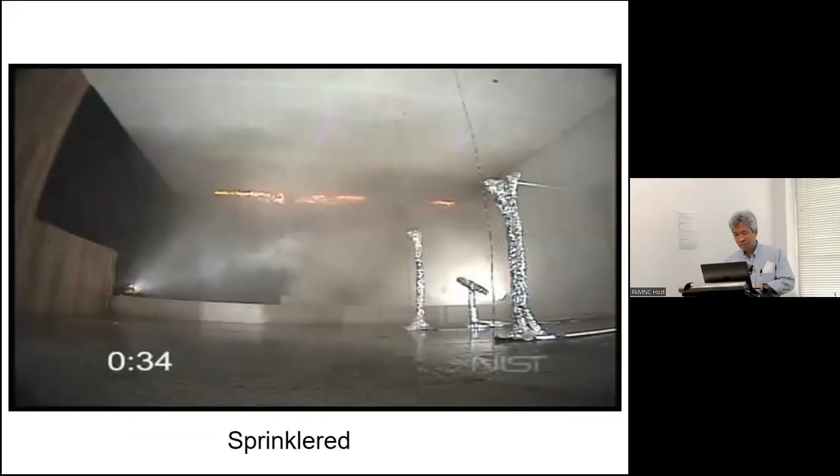How are we doing for time? 12:30. Oh dear. Okay, let's see if I can just find a few more things.

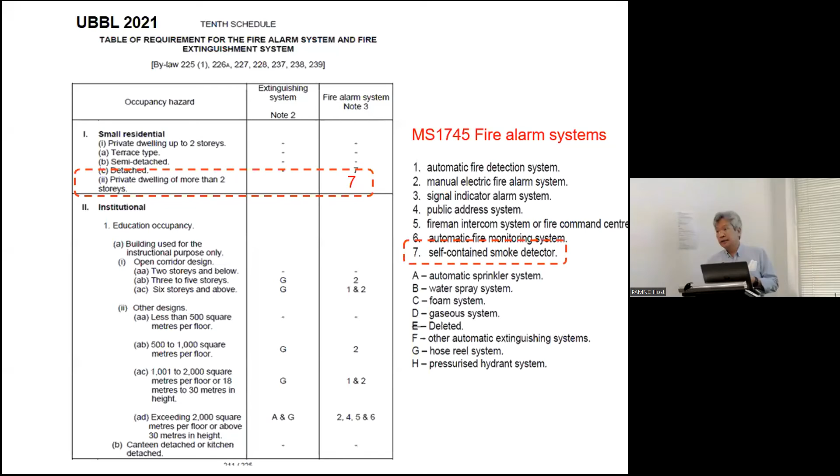Okay, then. Hospital patient accommodation - just now we mentioned, particularly patient accommodation wards, is now specifically defined in the 10th schedule together with all the necessary active installation. So again, the main thing is 750 square meters, and that's rationalized in the 5th schedule also on the limitations of compartmentation. And I have to emphasize, particularly for hospital patient accommodation, this 750 square meters is not subject to the doubling of volume if you have sprinklers. This is absolute, right? Just for this classification.

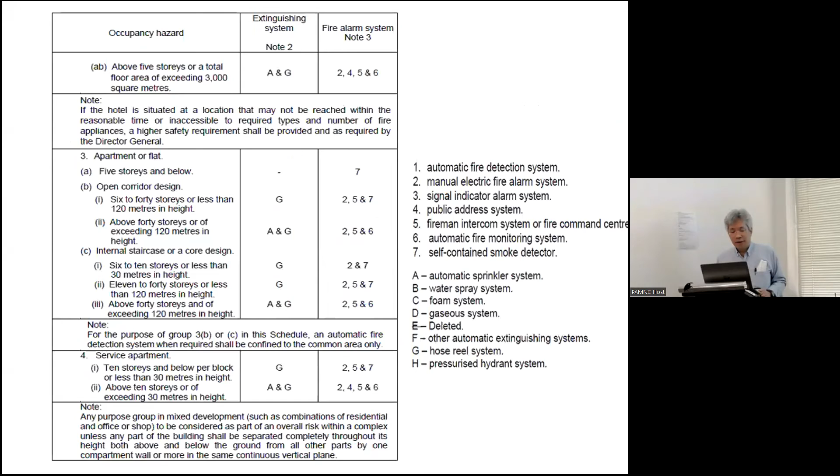Now, the one that we're all waiting for, all our developers are eagerly waiting for this - apartments or flats, tall apartments. Any building more than 40 storeys or exceeding 120 meters in height now will have sprinklers, for all residential buildings. And again it's the same concept: you're designing such a high-rise building, presumably you charge an extra 10% for every floor that you go up - yeah, you get sprinklers. You're buying a luxury apartment with sprinklers.

Okay, so it applies to both open corridor design and internal core design, both - once it's more than 40 storeys or above 120 meters, everything. Because it's quite meaningless if the guys who are living in the 40 floors below are the low class guys and the penthouse gets sprinklers. No, it doesn't work that way.

The idea - actually Bomba, we were also struggling. We were arguing why 120 meters? Why not 80 meters? Why not 40 meters? Why 40 storeys? Why not 39, why not 38 storeys? But ultimately it came down to the stack of the risers. The engineers were working day and night with Bomba, agreeing on the maximum limit of the riser stacks based on the capacity of the pump sets and the pressure valves and all those things. So 120 meters coincides with 2 stacks of the riser, 60-60. So they just have to find a common number to be able to draw a threshold.

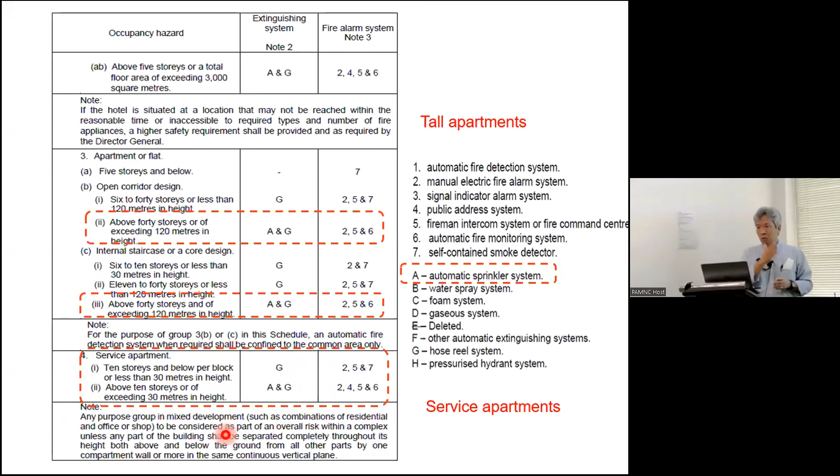So it's above 10 stories or exceeding 30 meters in height, you must have sprinklers. The definition has to be made very clear now, no more ambiguity by the developers. Submit building plan, is it apartment only, or sales and purchase as service apartment or hotel facility? No more - define it from day one. What is it? And we as architects take the key role. We say we have to design a building for you. Are we designing you a minibus, or are we designing for you a luxury MPV? Tell us now, so your direction can be very clear.

Additional clarification for the 10th schedule for hawker centers, food courts, etc. Essentially, this is about the installation of hose reels. Not too difficult.

Large single-story factories, there's a certain control now. Previously, single-story factories were like free for all - no limitations where people build sheds and all that. But now single-story factories are becoming very sophisticated, so we introduced this control. With the exception, we're still keeping the open structure design for this purpose. So if you are building an open structure shed for metal fabrication and all that, you can go with just hose reels only and pressurized hydrants.

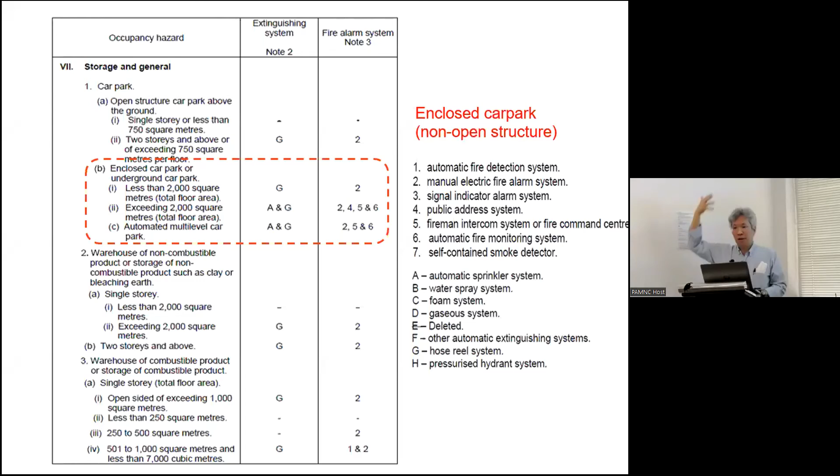Automated car parking, like the mechanical rotisserie or fully mechanical robotic car parking, works on a few concepts. Most deposit the car at the bottom and conveyors pick up your car and lift it. Some are like normal car parking where you drive around - it's only mechanized at the point of parking when they stack your car up and down. But this applies to all: generally, the moment it's mechanical or otherwise, above 2,000 square meters, you need sprinklers.

The open structure criteria from 2012 is carried over, except they also added one more definition called open-sided. This one is particularly for warehouse - an open-sided warehouse gives you the privilege of not having to use sprinklers for a single storey open warehouse.

As to how we comply with open structure and open corridors, we've gone through all of this already, so we're all very familiar. Only thing is, when it comes to that extra definition of open-sided, it is when you arrange your openings on all 4 sides - then it's called open-sided. So it's an additional criteria: for it to qualify as open-sided, you must first qualify for open structure, then have it on all 4 sides. Actually kind of easy - you're just building on the same definition.

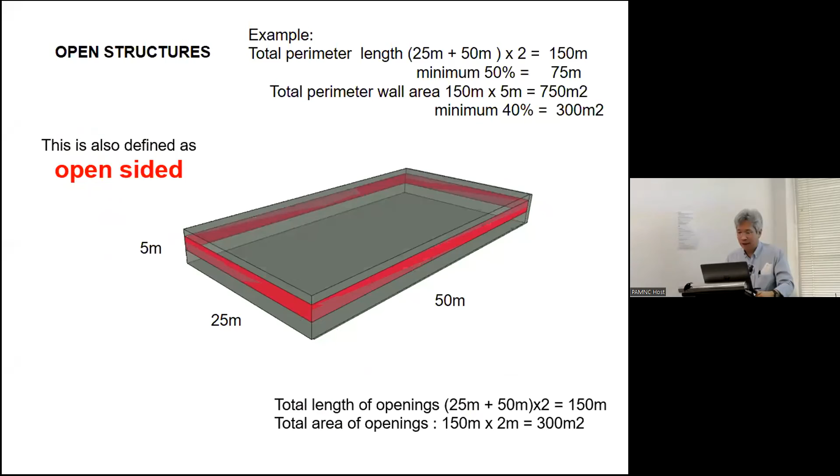Open corridor we mentioned already, so this is fine. And again, all these open corridor definitions are not to replace smoke control, not to replace your ventilation requirement. The sole purpose of this definition is exactly coming back to the 10th schedule for the installation of active systems. That is all - a lot of times, a lot of confusion.

Even Bomba themselves have a lot of confusion - they say once you achieve open corridor, okay, you've got your smoke control. No, it never says that. Smoke control is under MS 1780. As long as you comply within MS 1780, you need to have smoke control and all the parameters of smoke control.

This description is purely for the purpose of active systems. So like a factory, if you've got an open structure design, for this factory, steel fabrication and all that, you don't need any active installation. But if you do not comply with the open structure design, you end up having requirements for active systems, hose reels, and all the way to sprinklers.

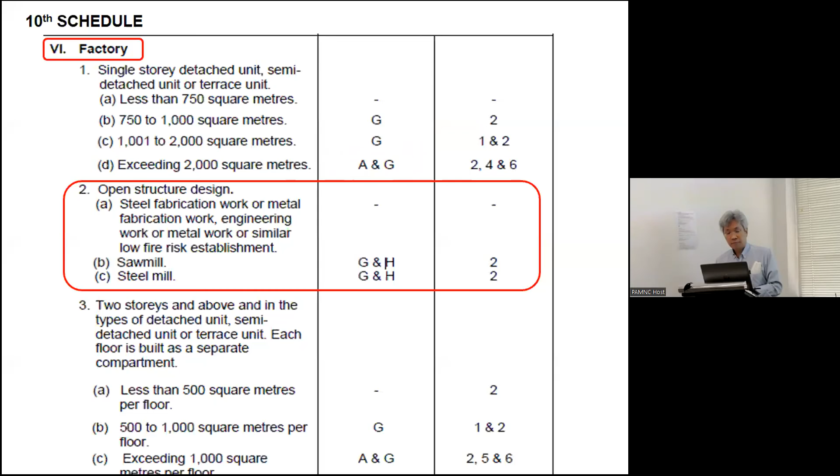The same thing goes with car parking. If you've got an open structure design, any size, you only require hose reels. But if you do not comply with the open structure design, you will need sprinklers, as we've mentioned, and so on and so forth.

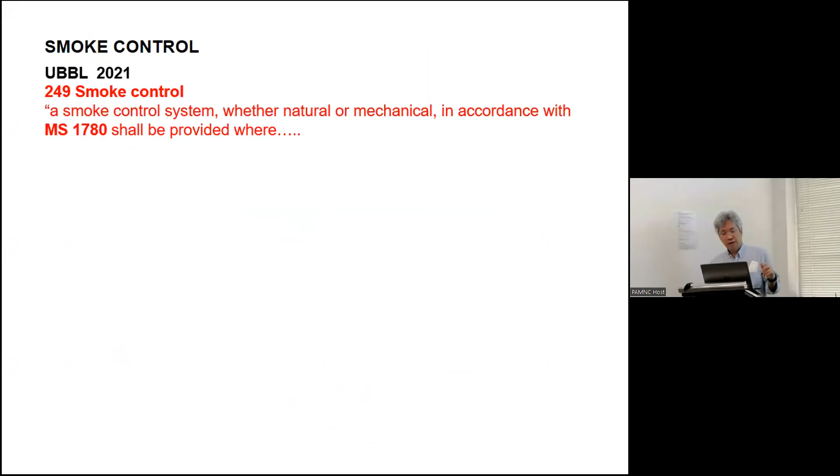Same with institutional buildings, whether it's an open corridor design or other design, you'll find that the requirement of a sprinkler is always there when your building exceeds a certain height. So smoke control has got nothing to do with that open structure or open corridor design. Smoke control comes back under UBBL 249 and under MS 1780.

Now this is where there's another change from 2012 to 2021. In 2012, we say that all smoke control systems must be installed in accordance with MS 1780. So MS 1780, among other things, says smoke control system is required for any area exceeding 1,000 square meters.

Now in UBBL 2021, under clause 249, it's decided that any compartment which exceeds 2,000 square meters shall be installed with smoke control systems in accordance with MS 1780. So we can all breathe a sigh of relief now because the limit is extended to 2,000 square meters.

This arose because we have a lot of office buildings, tall office buildings, which are now undergoing fire certification and all that, and we find that the common floor plate of an average high-rise office building is about 800, 900 to 1,000, 1,003 square meters—the center core building, that kind of thing. So that's exactly the problem.

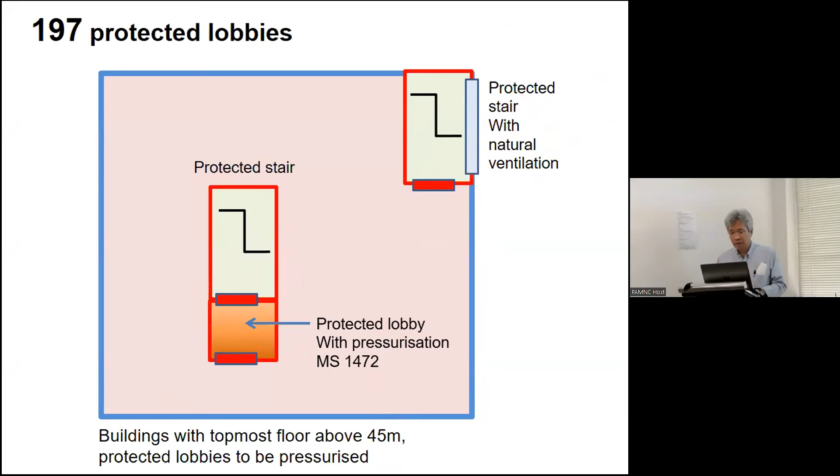Okay, hose reels. So there's much work that's been done on hose reels. The bylaw has never defined how we set up hose reels. Hose reels have always been under the mechanical system guide, which says you're supposed to provide hose reel coverage of 800 square meters. Mechanical engineers, they'll be able to do coverage by air duct and all that, but you ask them to put a hose reel there—how to cover, where to put the hose reel? We are the ones to do all the hose reel work. That's why you always get it wrong, always get Bomba scolding.

So even prior to 2021, we were already having a lot of chat with Bomba, but now with 2021 clause 226A, all hose reel installations refer to the Tenth Schedule for the application and refer to MS 1489 for how you install hose reels and the standards associated with it. MS 1489 is now undergoing revision, and a lot of the things we spoke about are now being channeled into the MS 1489 revision, but it is not out yet.

So as an interim period, Bomba is issuing this guideline or circular, purely as an interim thing until the MS 1489 revision is issued. But you can use this guideline as a basis. Generally, it's talking about the radial coverage of the hose reel now.

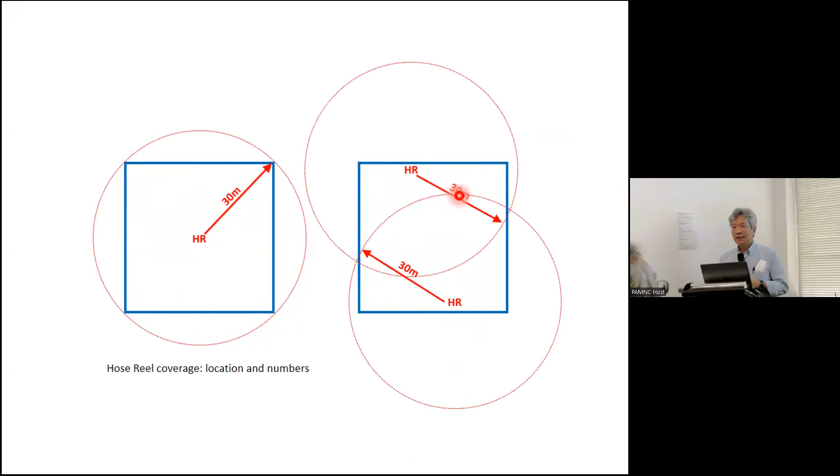From the engineer's look for us, okay, with this same diagram, position the hose reel there, hose reel position there, a little bit to that corner, and the other hose reel to this corner. And now the engineers are very happy. Good, Mr. Architect, now you guys sort it out. They're very happy, they're really, really happy that we took this over.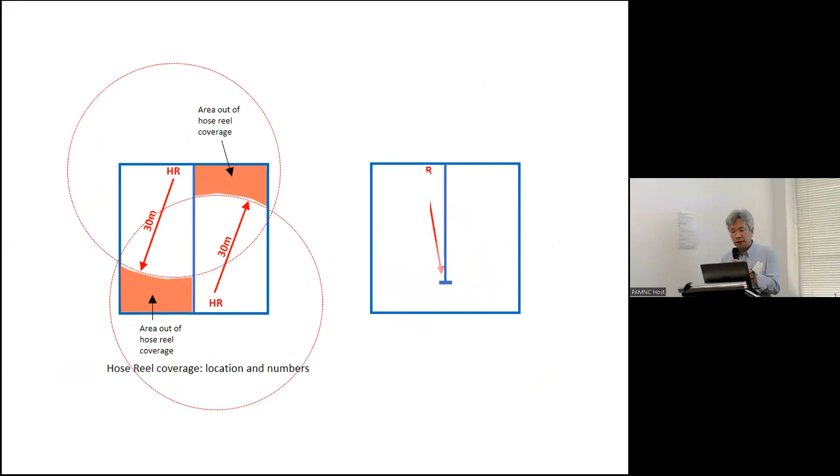Right, so again, using the same diagram in this situation, if this partition is not all the way through, I actually have an opening here using the same hose reel arrangement. So that hose reel will cover up to there, and this hose reel on the bottom will cover up to there. So this hose reel, because of the opening, is able to cover that space, but it will still leave the area uncovered.

So let's use this as a basic principle to check our hose reel locations, pending MS1486 and the revision coming out. Let's just do this. I think as long as you prove to Bomba, now Bomba, because of this, will start to ask you to actually show proof of coverage for the hose reel.

Yeah, a very good question. We haven't thought about that. The hose reels are really first aid, meant for the first occupants to use. I suppose we just have to look at it this way: if the occupant is in there and has to reach the hose reel, and it's at the other compartment, is he actually going to run to this compartment to look for the hose reel and pull it through to find the fire in this compartment? Probably not. So I think we have to look at it from a functional perspective. I don't think we're in a position to put into words, or especially into law, every single situation.

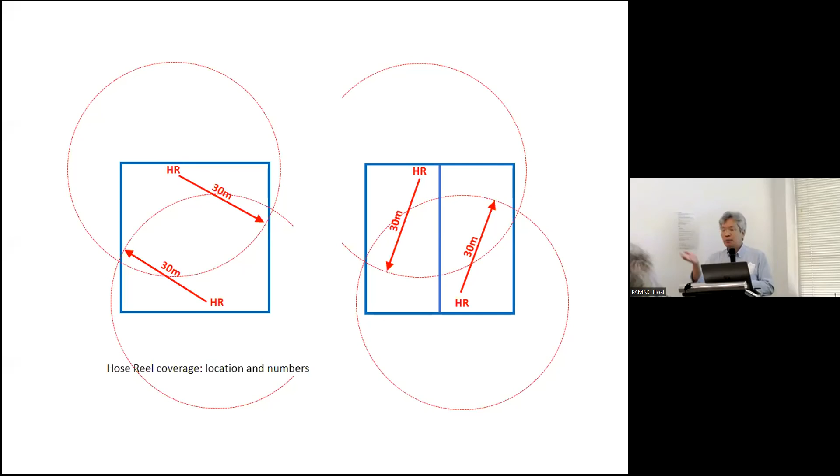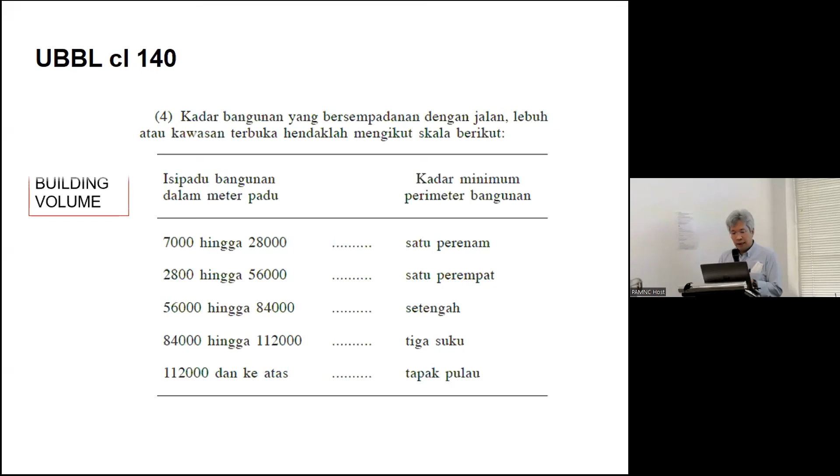Okay, all this remains exactly the same as before. Perhaps just a bit of a highlight over here - our UBBL is still basing the portion of perimeter access on the building volume. But in Singapore, they've actually moved on already. In Singapore now, it's both building volume, and for certain purpose groups, they also base it on the floor plate size and dimension. I'll illustrate a simple example for our awareness.

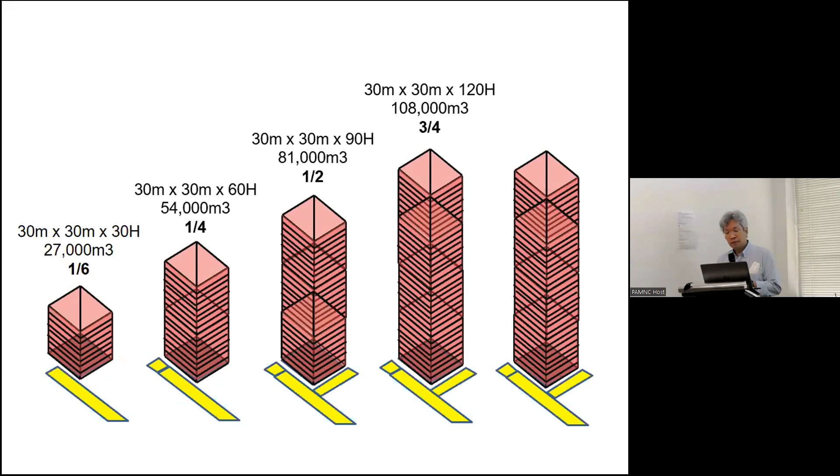If we base it on volume, for a high-rise building, for example, a building which is 30 meters by 30 meters in floor plate and 30 meters high - by volume this is 27,000 cubic meters. Our bylaw says you need 1/6 of the perimeter for firefighting access. So that's 1/6. Now if I increase the building, if I double the volume and it goes higher, I need 1/4 - meaning I'll just extend the perimeter access by 1/4. If I keep going on and on until it reaches an island site, by the time it reaches an island site, this building with such a small floor plate will have reached 150 meters in height before I require an island site.

Now, my personal opinion is that the requirement for appliance access, just because we're going by building volume for a tall building - exactly, I'm not saying don't do it. Don't do it - that's a design comment, that's a different thing entirely. But we have to understand what the purpose is. I'll give another illustration, comparing a tall building and a horizontal building with the same volume.

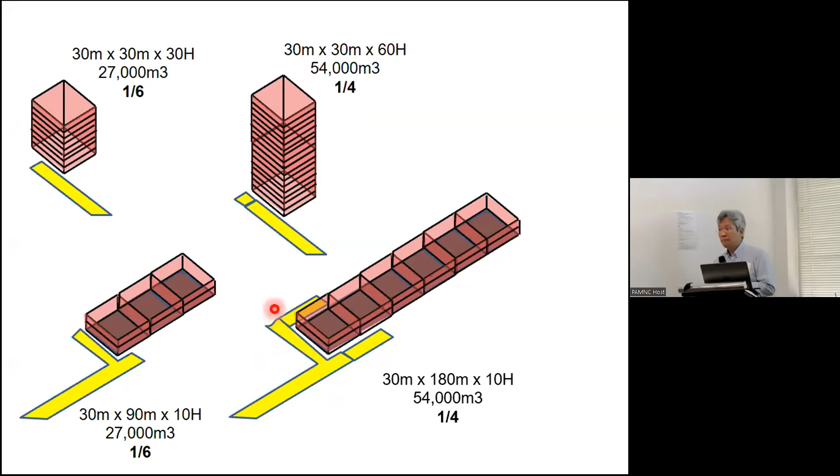I just need to extend the perimeter access this little bit, and I'm ready to fulfill the 1/4 requirement of the perimeter. But the building is so long. If I have a fire at the corner, isn't that a bit too far? Because this is a horizontal building, not a vertical building. We don't have an internal firefighting shaft. How is the fireman going to reach that corner of the building? You comply fully with bylaws, right? But you can't reach.

This is probably the next thing we're trying to get into now, maybe in another 10 years, the way we are going. Also in terms of the configuration of fire appliance access, on the contrary, everyone is saying minimum fire appliance access for tall buildings. But really, if we have a lower building with a deeper floor plan, you would actually need a lot more width for the fire appliance access than a comparatively tall building, because of the way they reach the skylifts.

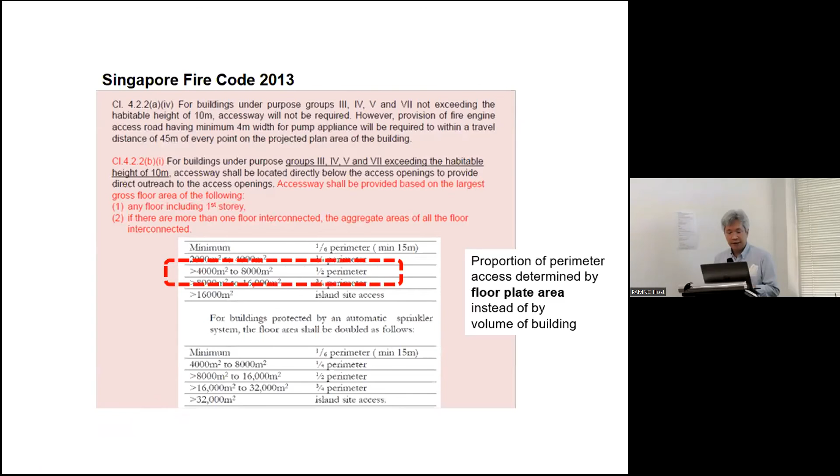If you look at the Singapore Fire Code - I'm not saying refer to this, please don't bring the Singapore Fire Code to Bomba, they will kill you - but I'm just using it as a reference. Here they recognize that there are certain building types where you cannot just use the volume to determine the reach of fire access. They're going by floor plates instead.

So as an illustration, using the local fire codes, our local UBBL, by volume alone I need 1/4, and this is the extent of the fire appliance coverage legally required. That's all I need, right? If I use the Singapore code, where they go by floor plate area, 5,400 square meters, they need half of the perimeter for fire appliance access. This means if there's a fire, half of the perimeter needs fire access reach. This is Singapore code, right?

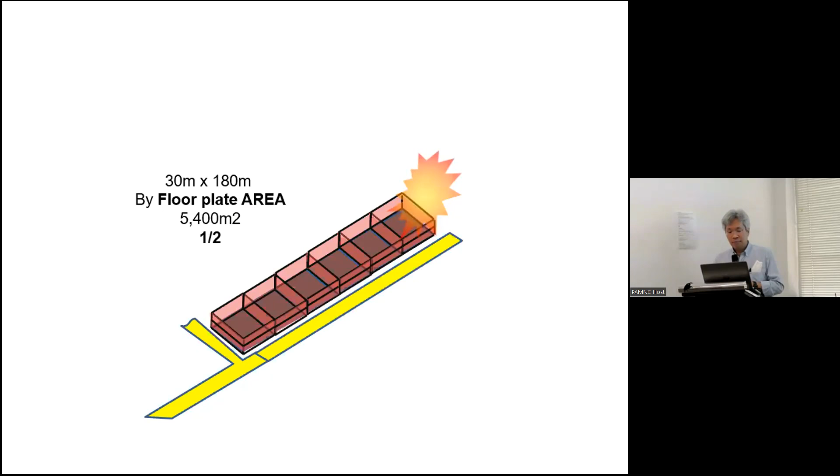So this is purely an illustration. We are not in Singapore. I don't think we want to move to Singapore, but when we design our building, let us take the next step. Let's take another step forward.

Because when we start to do this thing for Bomba, all this time, Bomba's biggest problem with us architects is like that - why are you guys always, not only not complying with the minimum requirement, but always asking for waivers that is less. That is Bomba's problem. Never has Bomba said, oh, architects are so good, the building here, you're proposing extra sprinklers, you're proposing extra perimeter access, even 12 meter wide perimeter access, not even 6 meters. Never.

We can always start, yeah, we can always start. That's why they're very, very appreciative when our working group goes in there. We're saying, look, really architects, we've got very, very good intentions in mind, but our problem is the client, right? So we've got a common enemy. And because of that, then they're very friendly with us. They say, oh, how do we work our bylaws? I see you put in the bylaws, the client cannot object immediately.

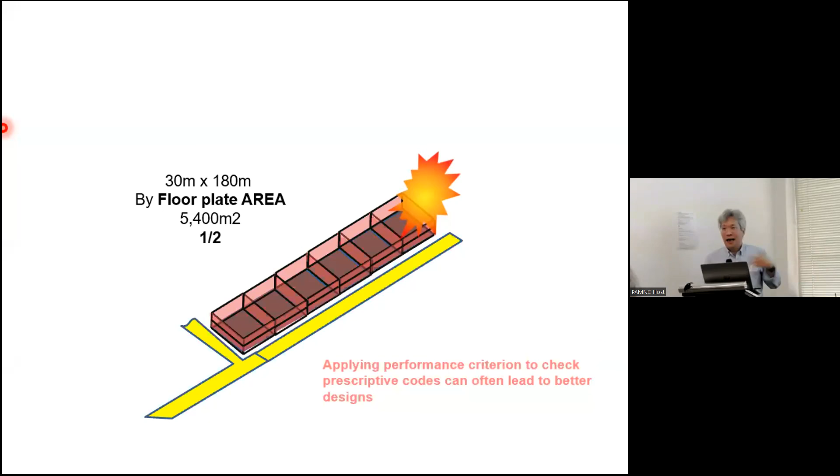That's why we start introducing all these things. So in a way, it's helped us by making the bylaws a bit clearer and more definitive. It helps us - we just go to the client and say sorry, we can't do that. And ask Bomba for a waiver or not - you go and ask, I'm not going to ask for you. That kind of a thing. So okay.

Okay, I think we've gone way for a long time. Okay, I think I'll skip all of this. Let's see if there's any other thing. Yeah, all these remain the same. We just made a lot more clarity. We've added more descriptions, clauses, describing all this. These are all the things that I presented to you guys for 2012.

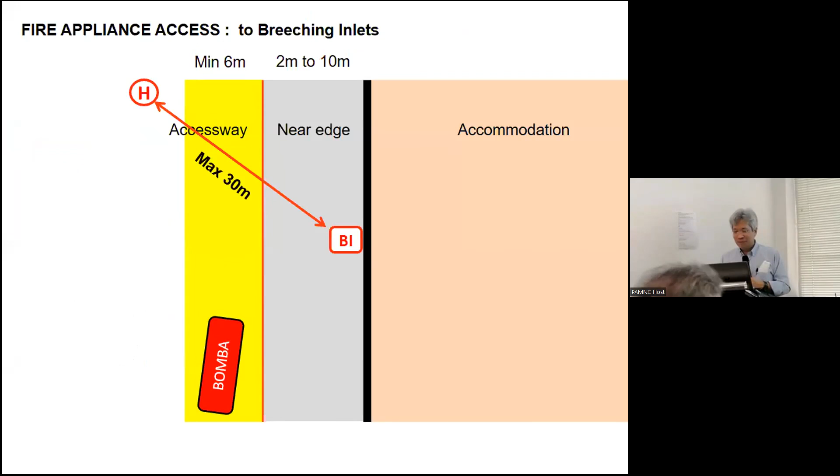But now, yeah, the new laws have got added clarity for all this. So now, yeah, we can confidently tell the client, I'm sorry, now it's the law - it's not our own arbitrary kind of interpretation. Okay, so okay, yeah, I think that should bring us to the end.

Okay, so just as a parting note, are we still designing to minimum prescriptions? Let's not do that. Let's go forward. Let's help Bomba to help us so that we can deliver better buildings for our very stringent clients. Okay, thank you very much.

Thank you, Lisa. Yeah.

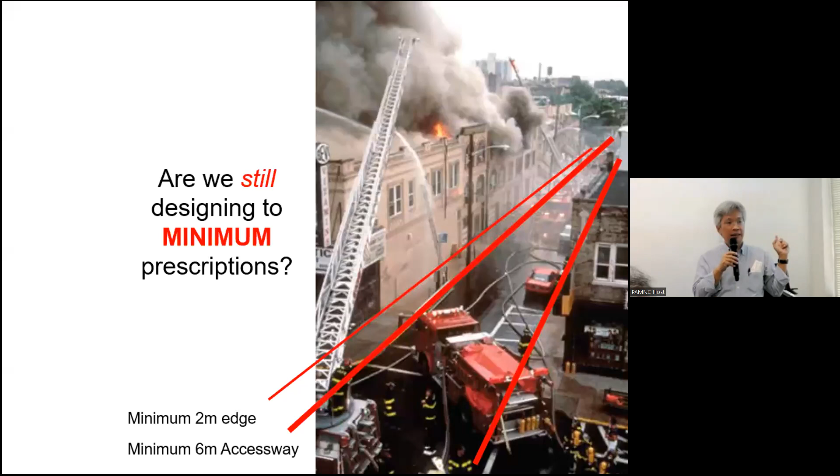The next one: when we were talking about the hospital, is a confinement center under institutional purpose? I think similar to that palliative care thing. Is it applicable if it's a confinement center? Yes, as long as it contains accommodation for bedridden patients or occupants. Confinement - actually mothers are walking around now. Yeah, you're right, but a confinement center does have the maternity ward. So if it's a ward in the hospital, then it falls under this occupation. Right, so if it's actually not a hospital, then this is not patient accommodation in a hospital - it's a hotel, correct. Yes.

The next one: what is the requirement for natural ventilation to corridors of other buildings, other than this? It's under the baseline ventilation requirements for staircases, corridors. Firefighting access lobby is added into the clause for firefighting access lobby, the 240 or something, but it's under space, light and ventilation, Part 3 or 4. So that's a standard ventilation requirement, not specific for firefighting purposes.

So the best is to read through all of UBBL? Of course, that's what UBBL is all about. That's the best answer, right? I think there's so much emphasis on firefighting, and I've always said that Part 7 and Part 8 are really more than 2/3 of the UBBL. Really, we must not neglect Part 1, 2, 3, 4, 5, all the way to Part 6, because that also covers CCC, our obligations, constructional requirements, space, light, ventilation, things like that. Let's not neglect that - it's not entirely about firefighting.

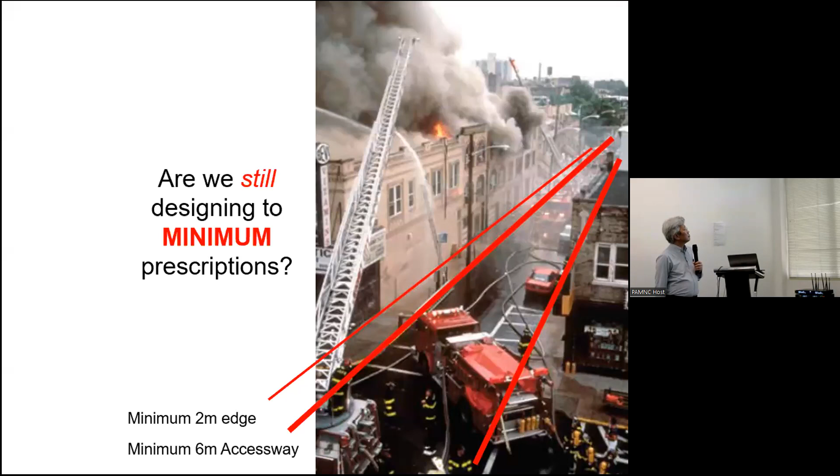The next one on the 6-meter bomba access road - must it be 2 meters away from the outer side of the external wall, even if the building is not - that one is called the near edge. So the near edge is defined such that it need not be a physical edge, it doesn't have to be a physical curb or apron. It is just a measurement - that means the legal line of the fire appliance access road allocation must be measured.